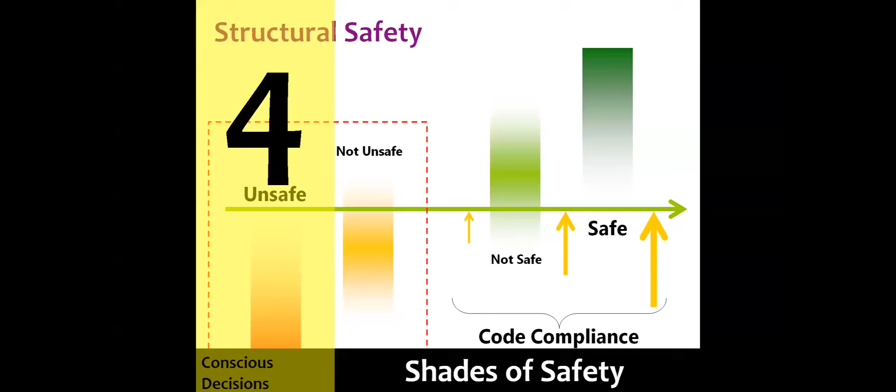So these are some conscious decisions to reduce the shades of safety that we are practicing today. We would like to minimize that into a small corner towards the right, and that will be our agenda for code compliance going forward. Furthermore, if you look at today's design process, we choose materials, design sections, and go ahead and build.

Whatever happens to the structure after that, we are not looking at it until the structure itself starts crying, which means that we have forgotten two more aspects of understanding the behavior of structures. Their overall resistance and overall deformability have not been considered in our design process. So it's a one-way process that we are adopting, but what we require is a closed loop process.

And so we are now projecting towards, or walking towards, a closed loop design process where a designer knows exactly what has been proposed through the good-for-construction drawings.

The next point that is in focus, and has only ever been in focus, is cost. Every time we talk of structures, we want to reduce cost. Now there are five aspects you look at in a structure: safety, functionality, sustainability, aesthetics, and economy. Every time they want to affect economy, it is safety that becomes the casualty. We would like to emphasize that there is a bottom line for minimum expectation from every structure, and that bottom line is safety, functionality, and sustainability. The only two negotiable items are aesthetics and economy.

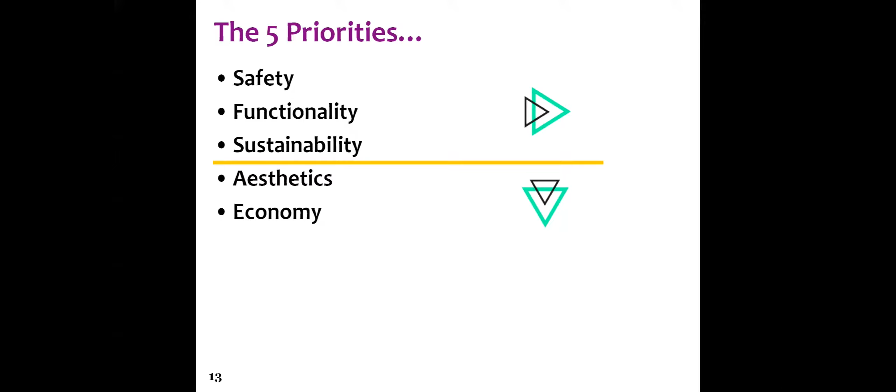Now you have two options: aesthetics on top, or economy on top. The first case is signature structures, where the owner will pay any amount just to make a statement. The second case is all the rest of the structures, where aesthetics is not necessarily the focus—if you can achieve it within that, well and good. So the sixth motivation for us is that this constant nagging discussion between economy and safety has to be clarified: there is only one boss, and that is safety. Nobody else is on top.

One interesting fact I'd like to mention: 78% of India was born after IS 456 was prepared. At least the design provisions were prepared in 1978. By 2000, we didn't make much change in the design provisions. We added some on materials, but that's not as large or significant as what we're doing this time. So I would say 78% of India was born after the standard was built.

So we are a little worried that we now have to go and unlearn and learn. 78% of India has to learn and unlearn the new standard we are coming up with, which means it has to be done in a participative mode. That is why we decided to have public consultations before we freeze the standard, because this percentage of people born after the standard is one too many.

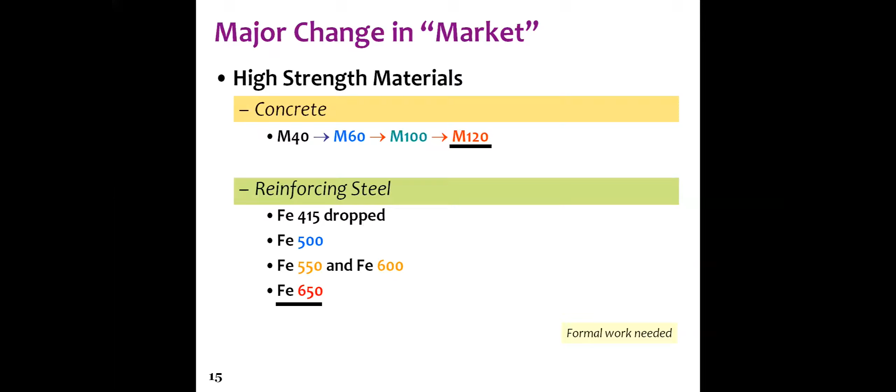We have design provisions understood up to 550, but not 600 and 650. Also, design provisions are understood up to about M40, M50, maybe M60 if you stretch hard, but not M120. So this is the game we are alarmed by: without formal work, we are going ahead and using these materials for construction where the standard has not yet admitted them.

We are also looking at a number of other important features that our standards keep using. IS 456 keeps using the words 'characteristic load' and 'characteristic strength' of materials, but are we really doing characteristic? When you look at a review of all the loads we have, some of them are mean and not characteristic. So there is a lot of formal work that we need to do on this front.

So why am I saying all this? Because even though we will come up with a standard this time, which is a little improvement over the previous one, I would still think the formal work has to begin in the country. If we have 11 chapters in the new standard, I would like to see a group of people on each of the 11 chapters steering the agenda for the next 10 years, doing deep R&D work, and coming out with valuable inputs so that subsequent revisions can stand on firm ground of self-reliance rather than peeping over the neighbor's windows.

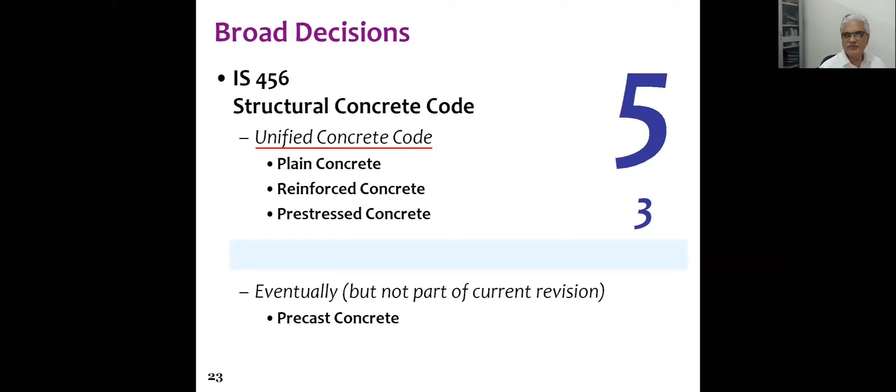Earlier we had thought of unified concrete code, but it will become unified only if we can get precast concrete in, which is not yet on the agenda. Maybe in the next revisions we will look at bringing precast also inside this one. So in all, the fifth revision of 456 and third revision of 1343 will together become 456, and we will not have 1343 in the time ahead after this revision is effective.

So what do we have, what are we expecting in the new revision? We're looking at 11 chapters. Other than the first three, we're looking at basis of design, design loads, structural materials, structural analysis, structural design and detailing, construction, inspection and testing, and dismantling and demolition. This is the overall layout.

So as you can see, Mr. Arora's group is working on chapter 6, chapter 9, 10, and 11. Also in chapter 8 on structural design, there are two sections, one on durability and one on fire resistance, that he will be working on along with his colleagues. He will present that to us after I finish. He is coming on and sharing what they are doing, what they have done so far.

Let's look at the design loads. These design loads existed in the document at different parts. So now we have collated them into two sets. We call them force loads and displacement loads, right? Force loads, as you are aware, are the traditional loads.

We are looking at the typical undergraduate student who wants forces given to him or her through the standard. He or she applies it on the structure, does structural analysis with a fixed base, and then gets the results of bending moment and shear forces. So that's the force load part.

But what is not taught in undergraduate education largely is temperature load. How do we bring the temperature variation as a matter of structural analysis? Creep load, shrinkage load, elastic shortening, foundation settlement may have been discussed in undergraduate, but structural analysis computer programs don't necessarily all have the foundation settlement part.

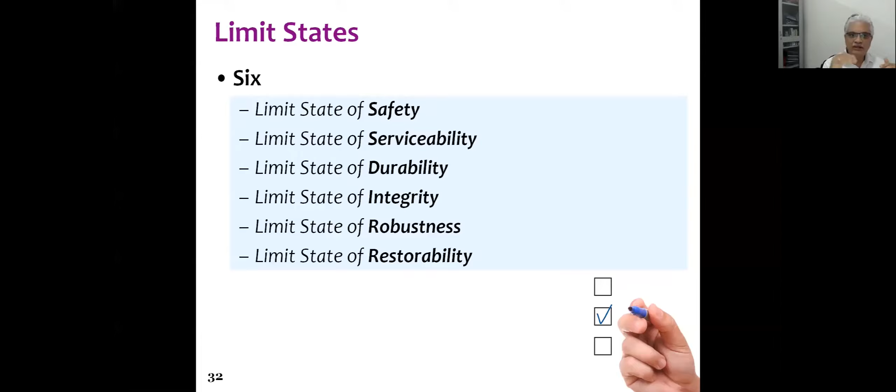Now what are these 6 items? Let's go one by one. Safety, I don't have to tell you - you apply loads and it can't take the loads, right? That's the game of safety.

So what are we looking at? We're looking at strains going past the material limits, or strengths going past the section strengths. I'll elaborate that a little later again.

Serviceability - you're familiar with this. We have deformations in the members, individual members, and whether these deformations are acceptable or not. Also, if you're looking at a structure that should not crack, we need to limit the stresses to less than the tensile strength values in case of reinforced concrete. Crack width should be limited, rotation should be limited, vibration should be limited - all these items come under serviceability.

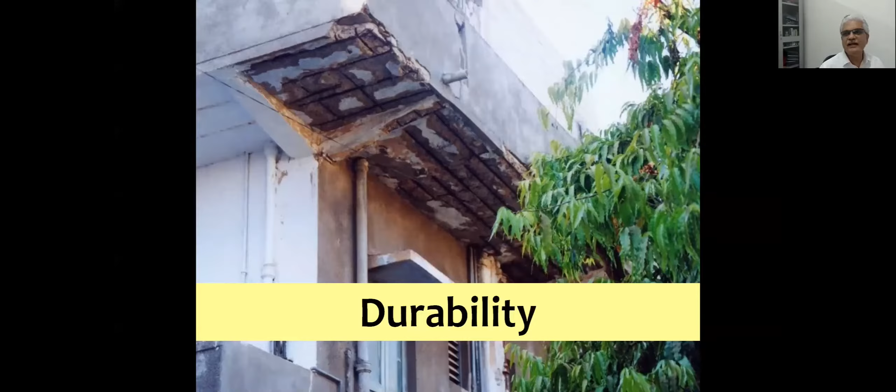Durability - you are seeing durability all around you, so I don't have to describe it. Whether this structure will last is the question. So far we don't have any method, but now we will tell you that you can design a structure for 50 years, 60 years, 70, 100, maybe 120 years.

You can decide, but the responsibility lies on you in ingeniously choosing cement grade, cover, pre-stressing steel grades, pre-stressing and reinforcing steel covers, grouts that you're using, water cement ratio that you will have. A number of items are there for checking durability, but you will now be responsible for choosing consciously

the life of the structure, and put one number on top of the drawing that this is the one I'm guaranteeing, and put your signature and a seal under it saying this is my proposal - good for construction and good for survival for so many years. That is what we will do as practicing engineers in time ahead.

Robustness is your fifth limit state. Robustness is to do with blasting, fire, and impact. So we are looking at strength - not the design strength, but the inelastic strength, the plastic deflection, the plastic rotation. These will be the items in focus for robustness. So now you already can see that we're not talking linear behavior - we're talking nonlinear behavior already in robustness.

Integrity: if one member goes wrong somewhere in a structure, will the whole structure come down? So you're talking about blast, impact, fire, and earthquake causing this one member to vanish. And if that happens, does the structure have enough redundancy, and does it have enough inelastic deformability, for you to be able to say that my structure is having the required integrity?

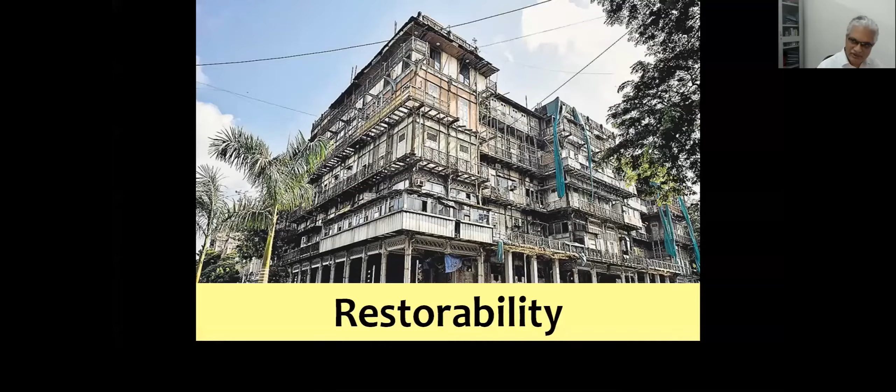So in case it is damaged or deteriorated, can we restore it back? But for this standard, the focus is: can you design a new structure to limit damage to accessible locations? That means you as a designer will choose exactly where damage should be, and place the damage, allowing it to occur only there.

Those locations should be accessible so that after the incident, we can go and fix that particular portion of the member. Also, the retrofit should not be extensive - meaning vacate the whole building, move everybody out, leave me for 2 years, I will decide what to do and give you the building after that, but before that give me a big check. No, that's not the method. It should be a limited amount of retrofit, and it should be at affordable levels, commensurate with the structure that we are discussing.

Small structures, mid-rise structures, high-rise structures - what can be done? This is what we want to come up with at the beginning itself. So restorability will also find center space, even though you may see only a few pages written this time, but we assure you, as we learn more, those few pages will become a large number of pages. As more of you contribute to what is restorability, we will come up with more clauses, more formal statements related to how to ensure damage is limited to accessible locations and that the retrofit is actually at affordable levels.

So putting all of these 6 in perspective, you are familiar with where serviceability and safety lie. This is what you're doing normally, and you're using linear analysis. The graph also shows you that more or less it's fine, we'll do it linearly, it'll work. But when it comes to robustness, integrity, and restorability, the game is on the horizontal part of the load deformation curve of the structure. That's where you'll have to change your tools - linear analysis will not suffice, and you will have to move in the direction of nonlinear analysis.

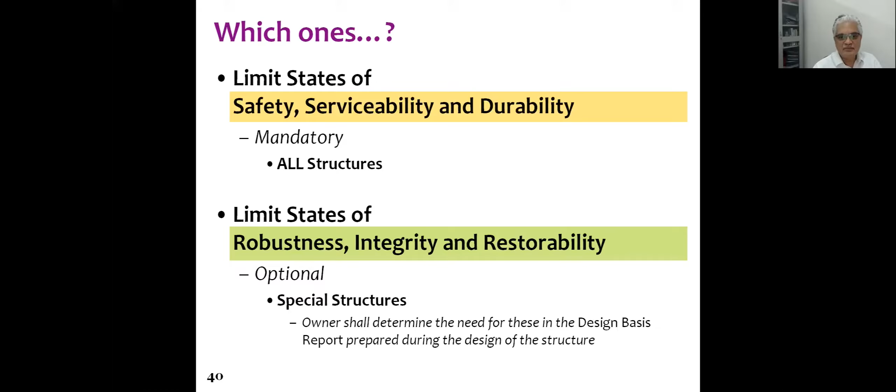But in all structures, the top 3 are non-negotiable, and that is what we showed you at the beginning: safety, serviceability, and durability - top 3 are non-negotiable. Bottom 3 depend on the seriousness of the structure, importance of the structure, criticality of the structure, and so on. We have some nationally important structures - we have to protect them, come what may. That will come under the total basket of 6 limit states. So let's look at some of the major changes that are coming up.

First of all, systems. I won't tell you which systems are admitted, but I'll definitely tell you which systems are worrying us. We are not sleeping at night because we don't know what is happening with buildings. The hotel I'm staying in is on a flat slab with post-tension PT slabs and has no structural walls. What is the lateral deflection? It's very worrying to go to any hotel in the country.

So we are now saying, please exercise extreme caution when looking at pre-tensioning and post-tensioning slabs used in any system, because in all 100 to 120 mm slabs, 4 major activities are happening: top cover, half of the anchorage, the draping, and the bottom cover. It's like magic happening, but I would like that magic removed so people know exactly the realities. Let's work harder and come up with the real truth on these matters.

Many of you have seen damages. Many of you have seen distressed conditions. So I don't have to say more, but I'm extremely and deeply concerned, as is the committee, that we don't know how to write provisions to stop this kind of unregulated practice from happening.

On the hit list are also 5 other items: open structures, open story structures, flat slabs used without protection of structural walls, precast systems, pre-engineered buildings, and all-wall buildings. We'll try to admit a few of them this time, like all-wall buildings and open ground story or open story buildings. But we personally think we have a long way to go in fixing the middle ground. We need to learn more, and a lot more experiments have to be done before we can make an emphatic statement. But until such time, it will be best for you not to adopt these systems unless you have evidence of experimental nature guaranteeing, through a full-scale test that you have shaken, that it is in order.

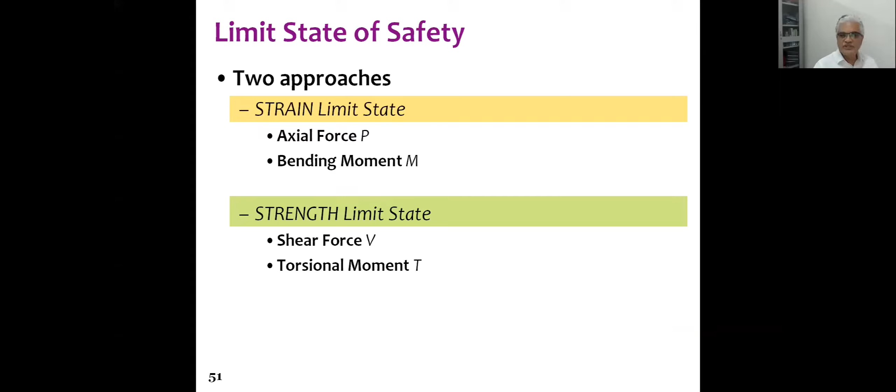So the limit state method is seeing a small change, but it has a great impact. We're not changing the basic framework so far, which is strain limit states for axial force and bending moment, and the combination of P and M, and strength limit states for shear force and torsional moment. This remains the same, but the way we do strain limit state for bending is going to change.

I must also tell you that in the 5th revision, we will continue with the strategy of the 4th revision, but we are poised to look at a possible 6th revision in which shear and torsion also should go into strain control and not strength control. This will require a few experiments to be done, and if that is done, we'll be able to win over the entire framework of limit state design a lot more respectfully than what we are doing right now, where we only know the strength of shear and torsion.

Because when you do, let's say, limit state of serviceability, you have to do some pushover analysis. For shear, there's no load deformation curve right now. We are adopting curves given internationally, but we have to develop that for our own Indian conditions. Now, the earlier strategy was that we were looking at the strength of a flexural member based on crushing of the core concrete, not cover, but core concrete.

But now we are looking at yielding of the steel bar as the basis. That is going to happen much earlier. And we are going to say that we want to have only under-reinforced sections. We cannot admit over-reinforced sections. That's a major change. We are insisting that it's very crucial for this nation to have under-reinforced sections than over-reinforced sections.

You might get embarrassed by seeing some of the changes in the geometries that you'll get. If you make this one small change, it will affect your sizing, but don't get too worried. In the 1960s, the structures were built following this principle only. Somewhere down the line, we economized so much that we lost safety. Now we'll bring back the 1960s again.

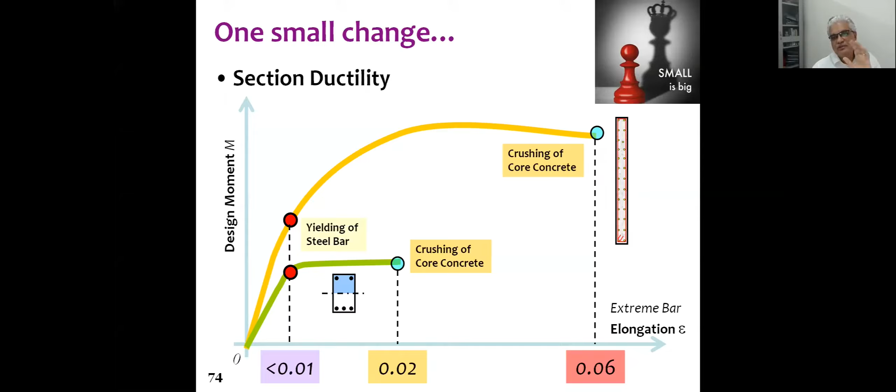Working stress method: in the middle, there was this excitement that we're going to get rid of the working stress method and we'll have all pure limit state design. As Jaya Bhaduri will say in Kabhi Khushi Kabhi Gham, 'Galat' - that's not true. We just can't do away with the roles and responsibilities of different methods.

Working stress method is very easy for us to do limit state of serviceability. Now, some of you can stand up and say, no, I'll use the nonlinear stress-strain curve, use limit state method and do that limit state of serviceability. By all means, you can do that, but the equations are intricate and involved, and so it will require more effort from your side. The same solution can be obtained easily by the working stress method.

As before, both of these methods are tuned, so they will give about the same result for limit state of serviceability - result in terms of section or amount of steel and so on. So it can't be too different, results will be about the same. So you will see that for deflection, crack width, all these, the working stress method, which is assuming linear relationship between stress and strain, all that will come in very handy.

Materials is an important section. Arora Saab will elaborate in detail. Let me just tell you quickly what's happening.

We're looking at major changes in ingredients. Guidance on the use of different cements will come - OPC, PPC, as general purpose cements. Can we use them for normal use? That's the question. Curing water, there's special requirements coming up now. You just can't use any curing water.

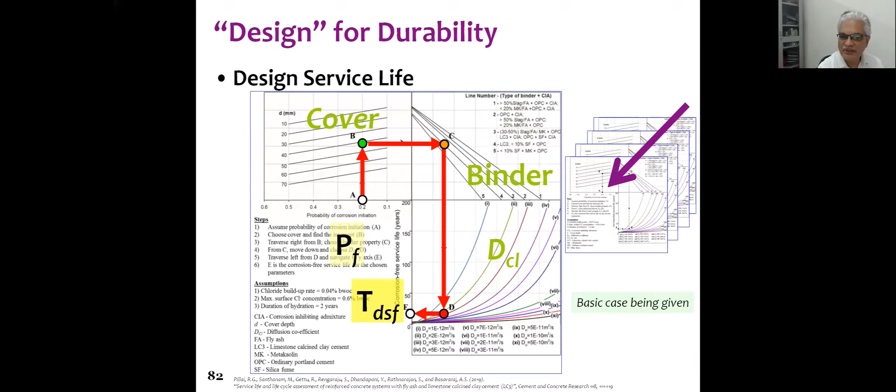If you want higher design life, you have to have very stringent conditions for the choice of materials, the cover, as well as the environment. So service life, as I said, can go up to 120 years.

Exposure to different classes shows different deterioration mechanisms. We'll give you the basic ones this time, and hope to keep adding new mechanisms ahead. You'll also see a climate zone map of India, with durability requirements specified zone-wise, making it easier, like you do for seismic zone or wind zone.

Only thing is, you have to keep an eye on wind zones, seismic zones, and now durability zones also, along with climate zones. You'll have to watch out for a multi-faceted design going forward.

And what is the impact of quality control? Quantitatively, that is what we want to bring about. Let's see what clauses we can carve out for you on this.

A procedure is given for carbonation and chloride ingress this time, but we may add more in time ahead. For the other deterioration mechanisms, deemed-to-satisfy requirements will be provided this time, so that you're not left open to do anything, but know what to follow until you have more knowledge.

It's like your mother telling you, after finishing school, come back straight with the rickshaw-wala, don't go here, there, anywhere. That is exactly what we're doing. After you finish carbonation and chloride ingress, you just do these steps and come back to say your design is deemed to satisfy. That's all.

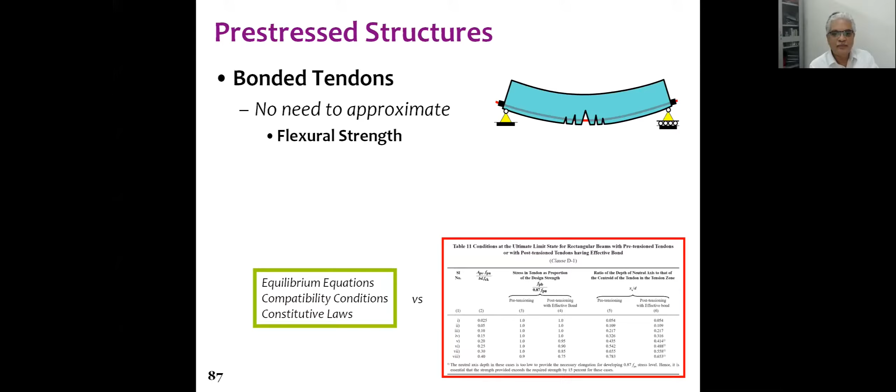You don't have to be preempted by the standard on what X by D will be. For the steel you are providing, you can come up with your own exact X by D, not bound by any prescriptive values. This will be valid for both bonded and unbonded tendons, in both cases you'll be able to do that.

You'll see some interesting ways of trying to estimate these strengths, very much in line with what you do for reinforced concrete. So it's not going to be a difficult surprise for you. What you do for RC, you'll do for PSC also, with small changes, as expected.

Structural analysis will be greatly elaborated and clarified. As I mentioned last time, serviceability and safety are done with linear analysis, and all others will use nonlinear analysis. Linear analysis is already there, you know it. What you need to know is nonlinear analysis.

In nonlinear analysis, if you can't do full nonlinear, an approximate one-level approximation for geometric nonlinearity alone is admitted. For material nonlinearity, no approximations are allowed, you have to go through the full hard route. I hope you will quickly learn the nonlinear tools so you can comfortably use them for the other three limit states: robustness, integrity, and restorability.

I'll have to come almost to the end now. I'm saying that this revision was particularly motivated to increase the sensitivity to keep in mind the teachers, and see if they can make it enjoyable to learn reinforced concrete design in the classroom and consistently give the same rendition so that students don't get mixed up.

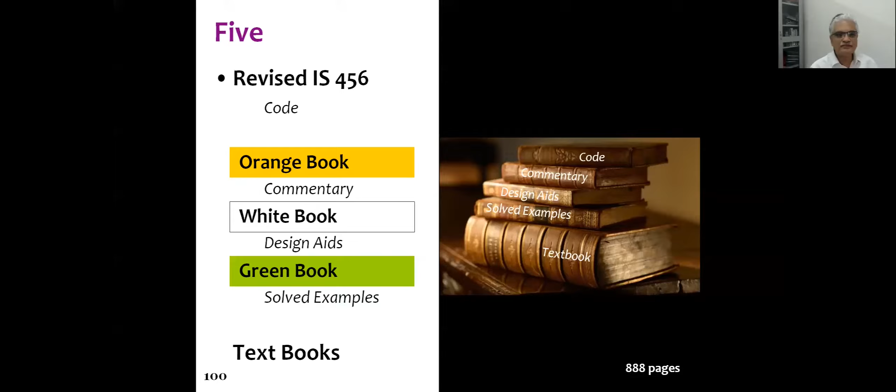So I'll stop here by simply saying that the new look that we are having for the structural concrete code has 456 and 1343 combined. The new limit states are defined, and the focus is on new structures as well as on assessment of existing structures. So design of the new and assessing the old.

Both are in focus, and that's why we brought in restorability also in focus and brought in nonlinear tools in focus, because a large number of us will have to do assessment of existing structures.

The higher grades of materials that are coming in are warranting us to change our design calculations. But since we don't have enough experimental evidence in all cases - we may have it for materials, but we don't have it for member behavior - the combinations of which grade of concrete, which grade of steel is acceptable, that answer we don't have yet because we haven't done experiments yet.

So we will have prescriptive statements for the time being, and I pray that you will admit that prescriptive statement as the way of life until such time more experiments are done. I encourage each one of you to encourage the testing houses, the academic institutes, R&D laboratories to do more formal work on the behavior of reinforced concrete structures. I prefer full scale, otherwise it will not give us a complete knowledge of what we have.

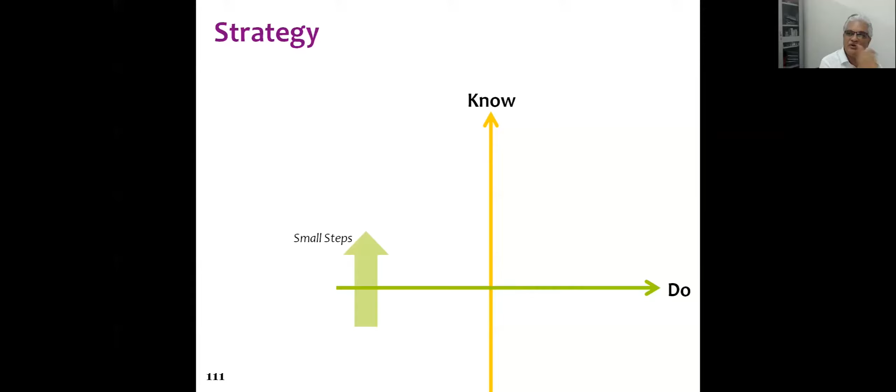Okay, the structural concrete code is only on its positive trend now. You just can't afford to slip it. It can't go in the backward direction. So give us only considered opinion that is good for the nation, and we'll take it forward.

And this time we'll guarantee you that safety will be on the driving seat. I would thank Alpa Shetji for putting together this forum and membership.

A large number of you have come in today to listen to the future of the nation on reinforced concrete structures. And I thank each one of you joining us, but I will thank you profusely in the event if you give us more inputs that the code committee can work on and build a much stronger code for the safety of everybody. And next time I go to any hotel, I won't feel uncomfortable that I don't know which structural system I'm sleeping under.

Right? So let's move from darkness, from untruth to truth, from darkness to light, and from death to immortality.

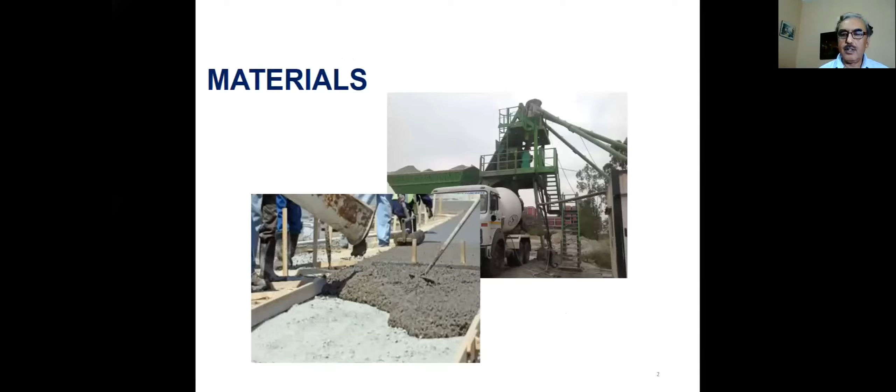Starting with materials, earlier we had material, workmanship, inspection and testing, and now we are having a separate chapter on materials which will include prestressing materials also. Then a separate chapter on durability design, we'll talk about durability in that chapter. Construction and quality control will be a separate chapter, and inspection, testing and monitoring of structures is a separate chapter.

Major changes have been just highlighted by Professor Murty also: guidance on different types of cements, updated water requirements, more types of chemical admixtures, limits on use of mineral admixtures, prestressing materials and grout of prestressing given. Concrete up to M100 included. Properties of concrete modified in view of the introduction of high strength concrete and new research during the period.

Same as for 383, there has been an expansion of the weight of different types of aggregates - what will be called normal weight aggregates, what will be called heavy weight aggregates, and manufactured aggregates, iron slag, copper slag, bottom ash permitted. Earlier it was mentioned only in 383. So this is now being brought into 456 also.

For using lightweight aggregate as structural concrete, we have a document on sintered fly ash aggregates for structural use. But we are not directly putting that in the main chapter of materials - we are simply referring it, and for using these aggregates, expert literature needs to be referred, as we have mentioned. There will be a separate chapter on special concretes where we will cover this. Those special concretes - we are not covering design procedure in detail in the code. So those are just to be touched on, like fiber reinforced concrete and lightweight concrete, so that we give some guidance, and then more literature can be referred while using those special concretes.

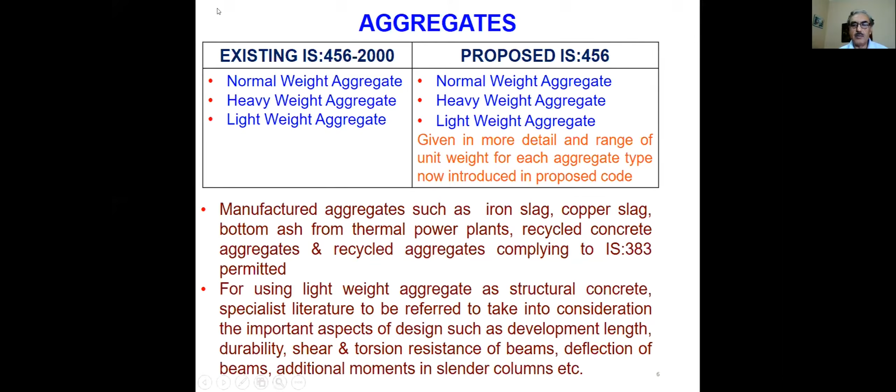Similarly here also, for cements - earlier we had been listing all cements in one go, saying all these cements can be used. Whenever you interview an engineering student and ask what are the common cements, he will start from rapid hardening. Most of the interviews we had been seeing that. So students won't know what is general purpose cement, what are special purpose cements, specific cements. So now this is separated out. OPC, PPC, PSC have been put as general purpose cements, and other cements have been listed, with some guidance given on where those specific cements are used, like composite cement - the new code has come. It was not in IS 456.

But as of now, the present position of the composite cement is such that we are not permitting it for RCC till the code is revised to some extent. So composite cement is permitted in plain concrete, which is not containing reinforcement.

Microfine cement is generally used for rock grouting and all that. Super sulfated cement, SRPC - these are sulfate resisting cement and special application cements, and these are to be used according to the applications listed in the code.

Coming to water, some more details have been added regarding what kind of water can be used. Natural surface water can be used, treated water can be used, water recovered from process in different concrete industries can also be used, as well as water from underground structures, recycled water, and desalinated water.

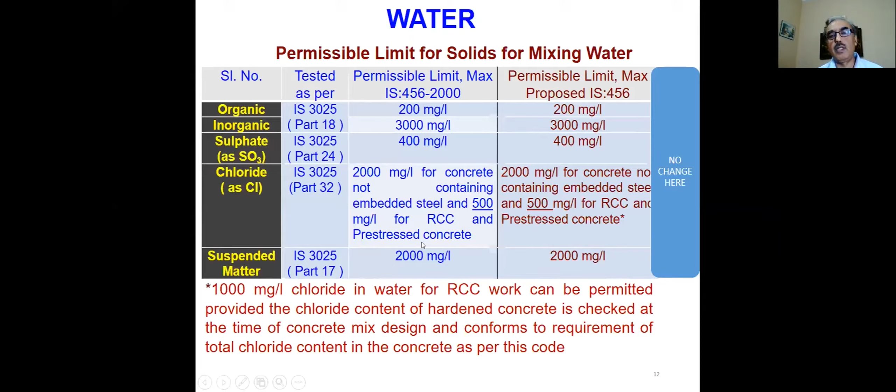For curing water also, we are not changing much of the specification, but for example chlorides up to 1000 milligram per liter - this is commonly used in many countries even for RCC. So this much we are permitting in curing water. Because for curing water, if we say 500, people don't comply, and without telling, they use it anyway. So we are giving some liberty, but if it is more than that, they have to use different water. Sulfates and chlorides - some minor changes have been made here for curing water.

Sampling frequency of water has been added, it was not there earlier, because water quality keeps on changing - the source keeps on changing. If some people are using tanker water many times, it changes quite a bit. So it has been mentioned that it should be tested every 3 months, and if there is no change or fluctuation, then the engineer in charge may allow a longer frequency.

Coming to mineral admixtures, all these admixtures are already permitted: fly ash, silica fume, rice husk ash, metakaolin, ground GGBS. Now ultrafine GGBS has also come, and that also we are permitting for use in concrete.

Other major changes with respect to mineral admixtures in proposed IS 456 are that the total replacement by fly ash and silica fume shall not be more than 35% for reinforced cement concrete. What happens is when we put fly ash in concrete, carbonation increases at a faster rate, which affects durability, so there has to be some limit. We have put 35 because PPC permits 35 as of now. I would have preferred 30, but 35 is agreed as of now.

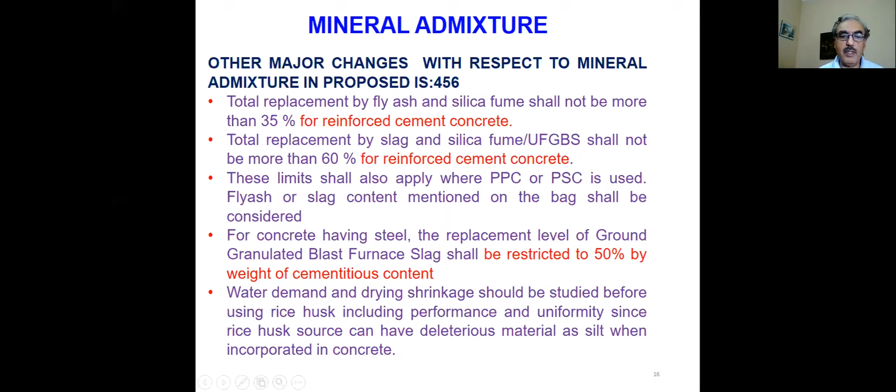Water demand and drying shrinkage should be studied before using rice husk ash, including performance and uniformity, since rice husk can have deleterious material like silt when incorporated in concrete. Rice husk has got more variability in quality, so these precautions have specifically been mentioned to be taken when using rice husk.

Chemical admixtures will be covered only in 9103 in detail, but we have mentioned in 456 that these admixtures can be used when conforming to 9103, though 9103 doesn't have these admixtures as of now. So we are parallelly revising 9103 also to include these chemical admixtures.

We intend to use shrinkage reducing admixtures because they are being commonly used in the country, people are using it, corrosion inhibiting admixtures, permeability reducing admixtures non-hydrostatic type, and permeability reducing admixtures hydrostatic conditions, PRA and PRAH they are called. Shrinkage compensating admixtures shall not be used in the country, this we are not permitting. Shrinkage compensating admixtures cause expansion to some extent to cover up the shrinkage, so they are not reducing the shrinkage, they are doing some expansion. So if expansion is little more than the shrinkage, it can be disastrous. So this is not permitted in structural concrete.

Grades: earlier also we had 3 categories - ordinary, standard, and high strength concrete. So these 3 categories we are maintaining, but we're going up to M100 now. Ordinary concrete is M10 to 20, standard concrete is 25 to 60, and high strength concrete is 65 to 100.

Earlier these definitions were not there, so we are defining this nominal mix or design mix. Ordinary concrete can either be nominal mix or design mix.

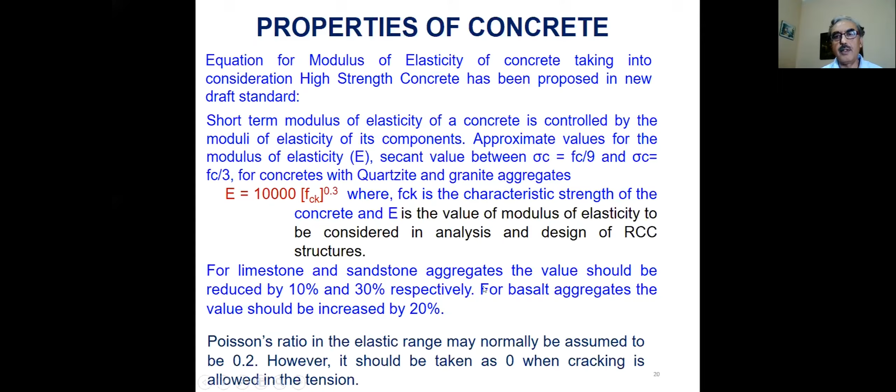Equation for split tensile has been added. It is FCT split tensile equals 0.5 into root FCK. And here also the procedure for getting the mean value is indicated for design purposes, design mix stages.

Creep has been revised. Creep in 456 was different from what was given in IRC 112 and elsewhere, Eurocode also, FIB - everywhere it is similar. So taking from the similar approach of FIB, which is used in IRC 112 also, this has been modified and somewhat simplified, and 3 levels of creep have been provided: creep level 1, creep level 2, creep level 3.

Creep level 1 is for RCC beams, frames and slabs of spans up to 20 meters and height up to 30 meters. Similarly, creep level 2 is pre-stressed beams or slabs of span up to 20 meters, buildings up to 100 meter height, and cable stayed bridges and all that. And creep level 3 is further higher.

Pre-stressed box girders, cable stayed arch bridges which span more than 80 meters are covered in creep. At creep level 1, the coefficients are only for all sizes, a single coefficient like in the existing code, given with minor changes in the values.

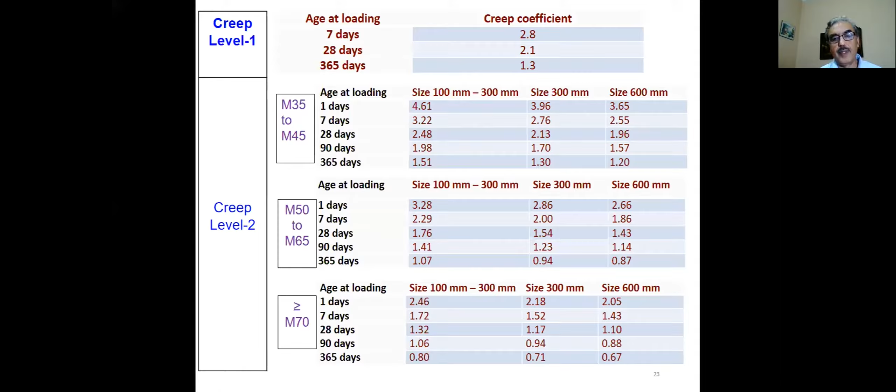These tables have been given. If you see the 28 days loading stage, there is not much change. For example, here it is 2.1, 2.48, and when the sizes are bigger it is somewhat similar, so it is just a little more rationalized. In case of higher grades, the creep is less; in case of lower grades, the creep is more.

Creep level 3 is when we go beyond 75 years service life, so some notional increase in creep is considered here, and formulas have been given to increase the creep calculated in level 2 to level 3. Then some additional coefficients have been given.

However, these coefficients are applicable when the compressive strength does not exceed 0.36 FCK at the age of loading, and mean temperatures are in the range of -20 to 40 degrees centigrade. If temperature increases, the creep coefficients have to be multiplied with a coefficient.

Shrinkage of concrete is generally in line with IS 1343, merged with 456, and the same has been adopted, which depends on the constituents to some extent and is a combination of autogenous shrinkage and drying shrinkage. Autogenous shrinkage has been given grade-wise, and drying shrinkage has been given for two values of relative humidity in the ambient conditions, 50% and 80%, for different grades of concrete. A coefficient to be multiplied is based on the size of the member.

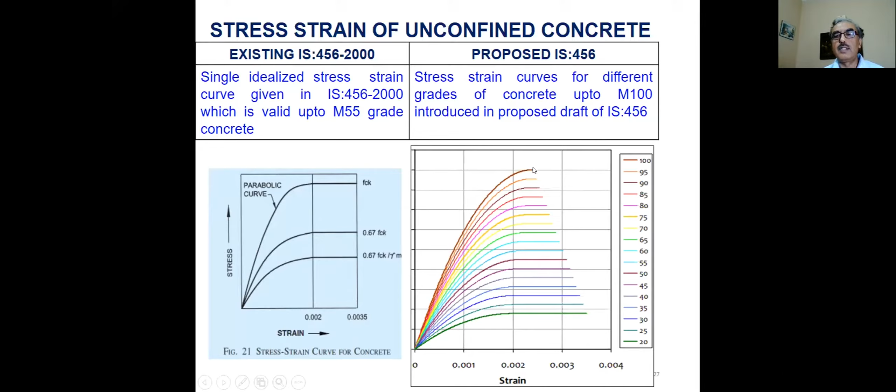If you go to M100, the curve becomes steeper, and there's not much difference between the peak and the ultimate, like we have here 0.002 and 0.0035. There's a big gap here, but at the top it's nearly matching. Keeping this range in view, for lower grades we have existing values up to M20, and then we are proportionally increasing it up to M100.

If you approach M100, you will see both values matching, 0.0024 and 0.0024, because there's no difference in peak and ultimate. So for M100 also we are taking this, and it gradually reduces to M20, where we have the existing values of 0.002 and 0.0035. Accordingly, the stress block parameters will change — it will become dynamic depending on the grade of concrete, which will be discussed in detail by Professor Rupen Goswami in his presentation.

Just a minute, why is it not moving now? Okay, sorry, it was stuck somewhere.

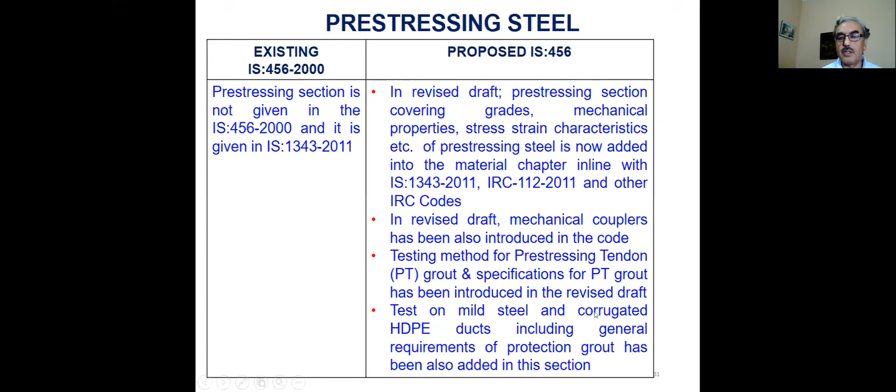So that covers the changes quickly, and now we can discuss the durability part.

As discussed this morning, we have given procedures for the design of durability, choosing the cover and grades to meet durability requirements. However, because durability is a very complex procedure with so many factors, not every factor can be accounted for. There are many factors like type of binder, and even within a particular type, what kind of chemistry is there, the ingredients, mix design, SCMs, and the environment - so many internal and external factors. Each factor cannot be put in, so some rigor also has to be based on experience.

Just as we were talking about working stress versus limit state design, here also we are keeping a limit state approach of durability design for carbonation and chloride. At the same time, we are keeping a deemed-to-satisfy kind of table like we had earlier, but in a modified form for different types of cement. I will discuss that - it is kept up to 50 years of service life.

Beyond 50 years, we have to do a detailed design, but there are certain minimum values we have to follow. So what we are covering is: exposure classes have changed, design for durability has changed, and we have permitted some protection measures, though not much detail is given on that. The concept of design for durability has been introduced, along with the concept of service life. There is now provision for durability design for 50 to 120 years, exposure classes for different deterioration mechanisms, and a map of India showing climatic zones linked to durability requirements.

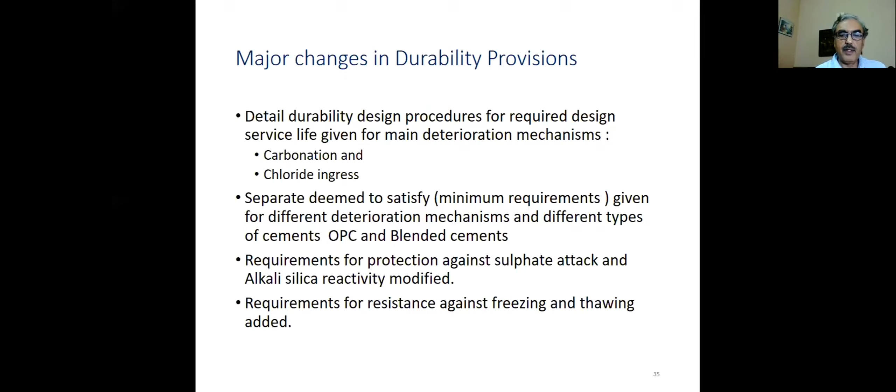Durability testing has also been introduced. Because we are making the code performance-oriented - specifications for grades or workability are already performance-oriented - similarly for durability we have to introduce performance-based specifications. One is performance design, then performance specification also when using the concrete. So some durability tests are to be introduced.

There are many tests like electrical resistivity, RCPT, oxygen permeability, bulk resistivity, and air permeability. Based on the data available, we have introduced these. I will discuss that.

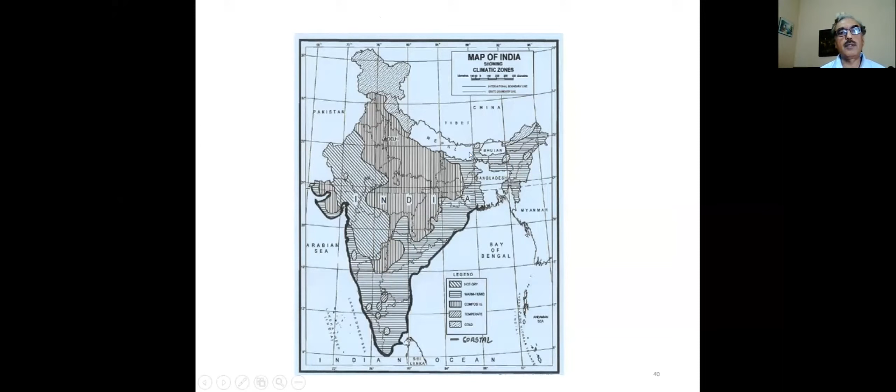Now what happens in carbonation? When we have reinforcement, it has got a passive film when we do RCC work. The calcium hydroxide present in the concrete, generated on hydration of the cement, provides a passive layer on the reinforcement. When carbon dioxide goes in, it reacts with the calcium hydroxide and disturbs the passive film, and the corrosion starts. That is the main mechanism in most part of the country.

Now this rate of ingress of carbon dioxide will be determining your service life. This varies for different types of cements, different types of binders, with different water cement ratios. If it is more dense, it will be slow. If higher pH value, your carbonation will be lesser. If there is a low pH value already in the system because of blended cements, high value of fly ash,

50% of fly ash, the pH level goes down to anything, so there is hardly any protection available to reinforcement. So if you know the carbonation coefficient, the rate at which carbonation goes inside, we can determine the service life because we know the relationship. We have got equations for that.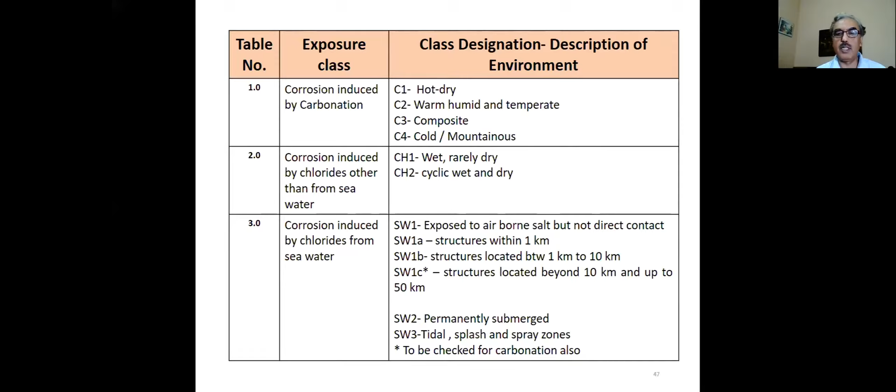Similarly, for sulfate attack we have given 5 conditions, and for freezing and thawing also 3 conditions for which the guidance has been provided.

Now coming to the design for durability, this I think mostly we discussed, we come to that. Now coming to the carbonation induced corrosion procedure, sorry.

We have provided a design table for normal structures subjected to carbonation for 50 years design service life, for quality control levels of 2 and 3 and importance level of 1. The design table gives requirement of minimum cover, limiting value of maximum water cement ratio, water cementitious ratios, cement content and type of cement, minimum cover requirement, and durability test requirements.

This is the existing table. We had a very small table and it was not related to the type of cement being used. This is the new table we are giving for 50 years service life, quality control level 2 and 3. What is 2 and 3 will be discussed in the quality control chapter. Now here, for example, the hot and dry environment.

For external members, if using OPC, these are the values of cover, water cement ratio, and minimum cement content you have to maintain. If using PPC or OPC with fly ash, these are the values you have to use. Similarly, for other conditions, for warm and humid and temperate environments, for internal members it's different. For external members, it is more stringent.

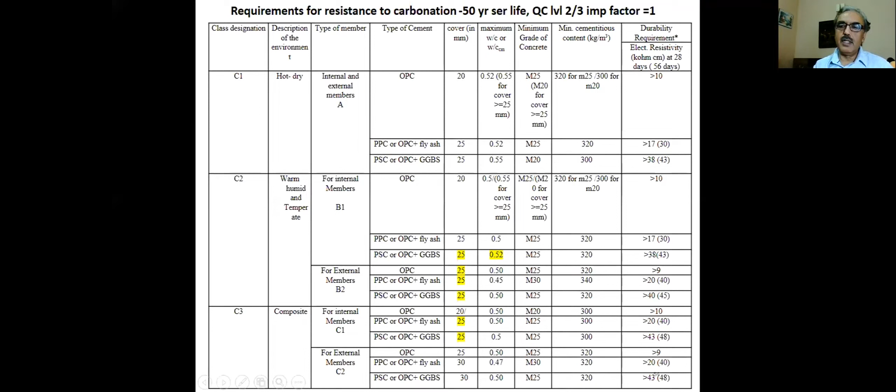This is for composite environment and cold environment, cold mountainous. C3 was already discussed, with internal members and external members, and then we have put some notes as they were earlier. Now also we have put some notes that where the grade of concrete is more than M30, durability testing may not be that essential.

And for quality control level 1, where the durability tests are not being done, the minimum grade can be increased. So those kind of additional notes have also been put for adoption at different areas where we don't have facilities, or where we're using very high quality concrete - then this durability test may not be of any value, because we will be achieving it in any way.

That is the kind of minimum requirement we put in the table, but for higher values of importance factor or for longer life than 50 years, we have provided a procedure for the limit state design of carbonation induced corrosion.

The basis of the following parameters: first we see what is the definition of limit state for carbonation we have to use. The limit state of durability for carbonation induced corrosion will be the initiation of crack due to reinforcement corrosion, caused due to depassivation caused by the carbonation process. This is how we are defining a limit state.

So when you achieve this limit state, your service life is over. This is a presumption for new buildings. It is not for existing buildings, that a crack has come and service life is over - we are not saying that. This is a design process for new structures where we have to say how we design. That's a systematic procedure which everybody has to adopt.

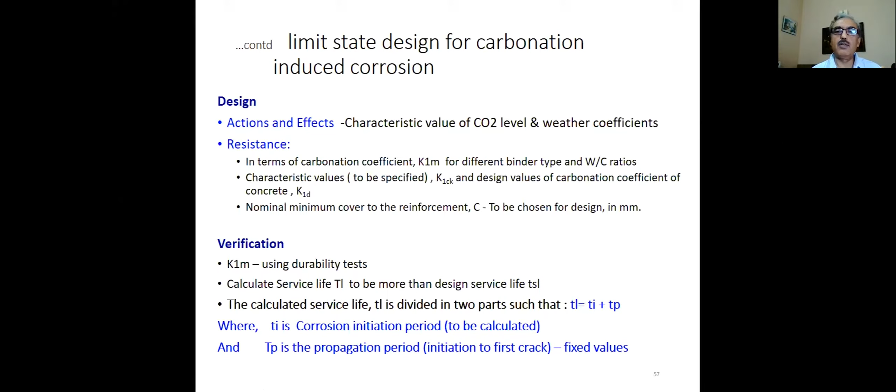And the remaining is the propagation part, from initiation of corrosion to the cracking. Now we have got a reasonable model and data available on the first part, that from the date new structures' concrete is laid to the initiation of corrosion, we have more data and equations available. But for the propagation period, the process is more complex, and though models are available, they are more complex, and as of now they have not been included. So for the propagation period we have given fixed values, and we can deduct the propagation period from the service life, and from the equations determine the other parameters. I will discuss that.

Then we work out the characteristic value of coefficients by adding some standard deviation, which can have levels also. And then the design coefficient to be adopted, keeping some margin of safety on that, which we are putting - not very high - factor of safety, because even 1.1 changes the structural requirements significantly, cover requirements and grade requirements.

Nominal, then we come to the minimum cover. We have got a nominal cover, then we have design cover. We put some factor of safety - where quality control is high, we keep it 1, because we are not permitting any negative deviation in the cover per our specification tolerance factor. But where the quality control level is poor, the cover can come down there also, so we are having some factor of safety on that too.

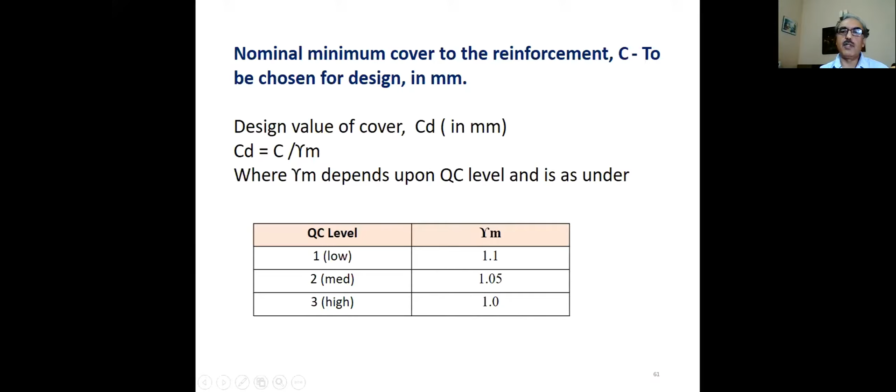For the propagation period, now we have a table which is based on the grade of concrete, type of exposure class, type of member, type of cement. Now this propagation period we have kept at 5 years to 13 or 15 years for different types of structures and these parameters. The remaining part has to be determined from the equations given in the code.

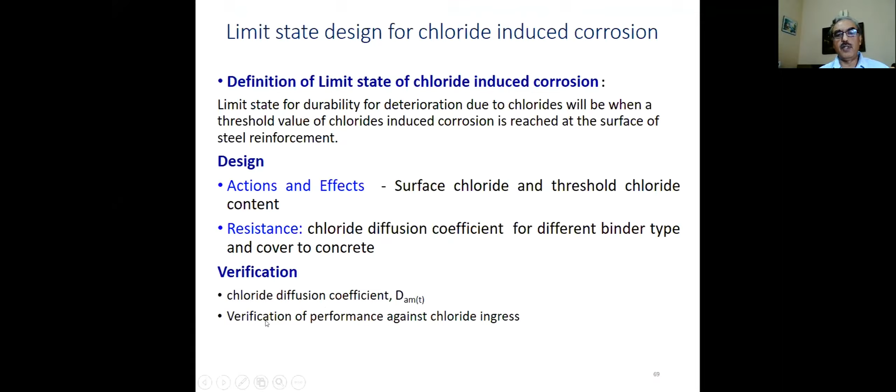Now what chloride concentrations do we consider for designing? Near the shoreline we take 9 kg per cubic meter as surface level chloride content, at 1 to 10 kilometers it is 1.75 kg per cubic meter, and at 10 to 50 kilometers it is 1 kg per cubic meter. This 1 kg is quite close to 0.6, which we are permitting in any case as an initial chloride in the concrete itself, and at this level generally corrosion does not occur in many cases.

Threshold chloride content: earlier, generally in ACI also, it was taken as 0.4% by mass of cement. But research done, specifically data given by Professor Radhakrishna Pillai from IIT Madras, found that in case of PPC and PSC, though the resistance to chloride ion is more, the threshold value is less than that of OPC.

In case of OPC, threshold means when the chloride concentration near the reinforcement reaches 0.4% by mass of cement, then corrosion initiates—that is called the threshold limit. So in case of OPC, we take it as 0.4%.

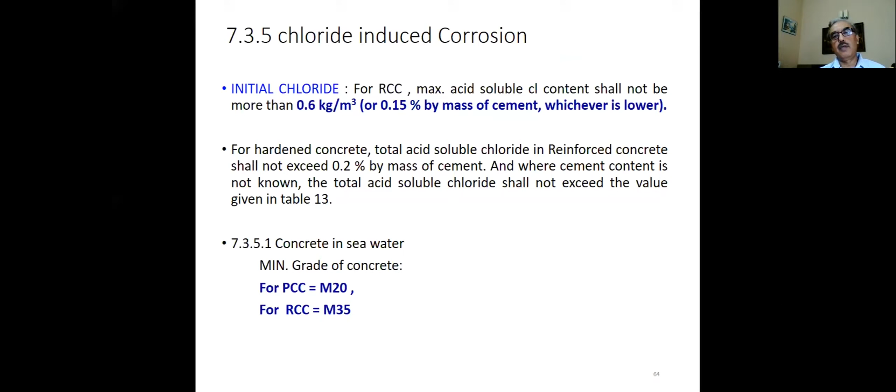In case of chloride ingress, there's a definition I had mentioned somewhere regarding the limit state for chloride. In case of carbonation attack, we said the initiation of crack is the limit state. But in case of chloride attack, the limit state is taken as the time by which the threshold value is reached—we don't wait for the crack.

So when the threshold value of chloride is reached at the surface of the reinforcement, we consider that as the limit state here, because in case of carbonation, at many places the propagation time is very long, say 10 to 12 years. But in case of chloride, because moisture is mostly available, the propagation time is less. So that has been ignored, and the threshold value has been taken as the limit state.

Coming to the sulfate attack, this table has been revised.

The exposure class is not much different from the earlier one, but what is happening here is that this is an existing table, and this is a new table. This is not yet finalized; it is yet to be discussed, and these values are not yet filled in either. But what we are going to introduce is high strength concrete in this.

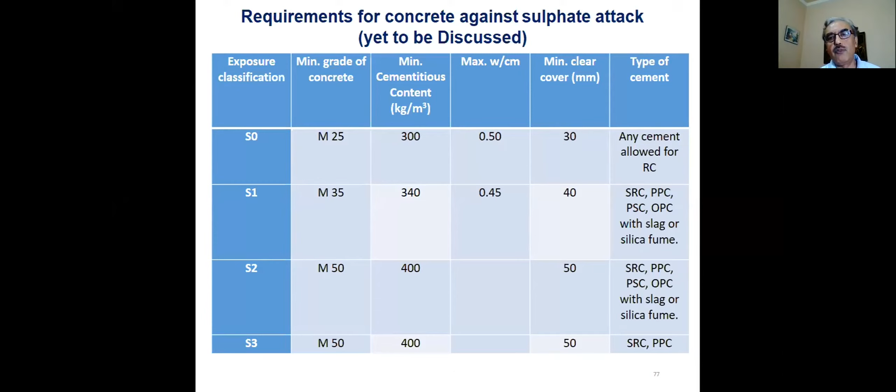Freezing and thawing has been discussed in the new code: the process, factors affecting it, a table for mean total air content, a design table, and recommending use of silica fume. I've not given the table here, but we have given air content values for different levels of exposure conditions. Like in freezing and thawing, we have made exposure conditions into 3 levels, and for different levels, different air contents have been mentioned.

Alkali aggregate reaction - the process is the same: alkali aggregate reactivity, alkali-silica reactivity, and alkali carbonate reactivity. This is silica, not aggregate.

Test methods: accelerated mortar bar test was not there earlier. Now we are introducing this also, accelerated mortar bar test. Mostly the ASTM mortar bar test is used, so it's a similar test. Now we are including that as well, and the mortar bar test is already there, so that will follow.

In mitigation measures, we had been saying that additional advantage can be gained by putting fly ash and using PPC. But now we are saying alternatively PPC can be used - it is not that only OPC has to be used and additional advantage taken separately. Because PPC and PSC provide a distinct advantage over OPC in case of alkali aggregate reaction, they provide very high resistance.

And there are test methods to again verify this. So what we can do is not only the standard testing, but use the proposed PPC and PSC and do a test. If the expansions are within limits at 16 days, less than 0.1%, we can use that. So these are some of the changes made. It's a kind of updation, nothing major as such.

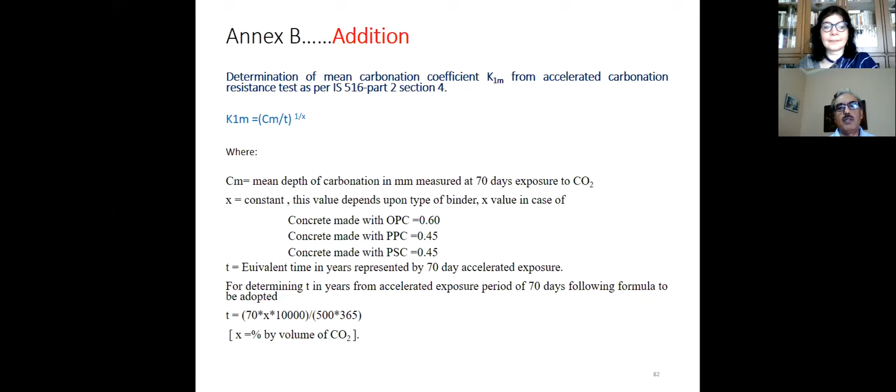No, thank you so much, Mr. Arora. Thank you so very much. It was fascinating. I must say you took us into a completely new territory of design for durability. And this is not just exciting but also very timely. And frankly speaking, for the rest of the design engineers, I think we just can't wait to get our hands on the draft when it is ready to really get our hands dirty, so to say, in designing for durability. Once again, thank you very much.

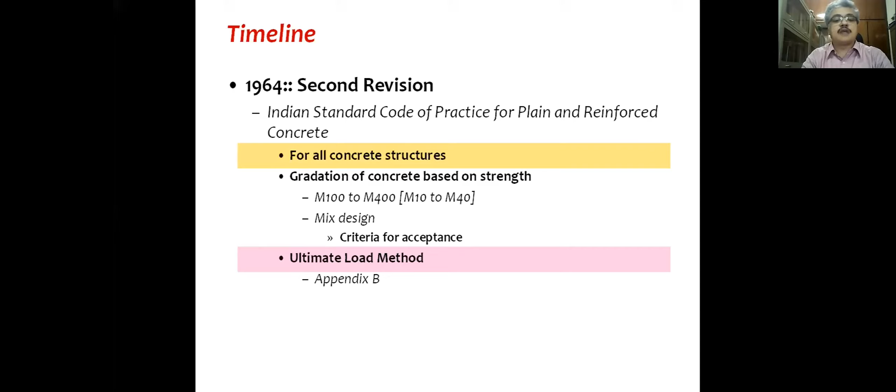In the second revision in '64, IS 456 was really opened up for all kinds of concrete structures. Very interestingly, in that revision, the ultimate load method was introduced, though in the form of an annexure or appendix B. This is where it all begins for us even today, because this is a quote from the '64 version, which talks about the concrete stress block. Until then, we were doing working stress methods, so we never bothered talking about a stress block. But here it said that it could be assumed to be a rectangle, trapezoid, or any other shape.

But then we chose to use this very familiar parabolic stress block, and there are many good reasons why this is a good choice, which we will not go into now. So essentially, this was the stress block used for the ultimate load design.

Then in 1978 there were a lot of changes, and one was that we migrated from working stress, and instead of going towards ultimate load, we moved to the limit state method. There were many good reasons for doing that, and even today it's an important thing. A lot of changes happened, but this was the key one.

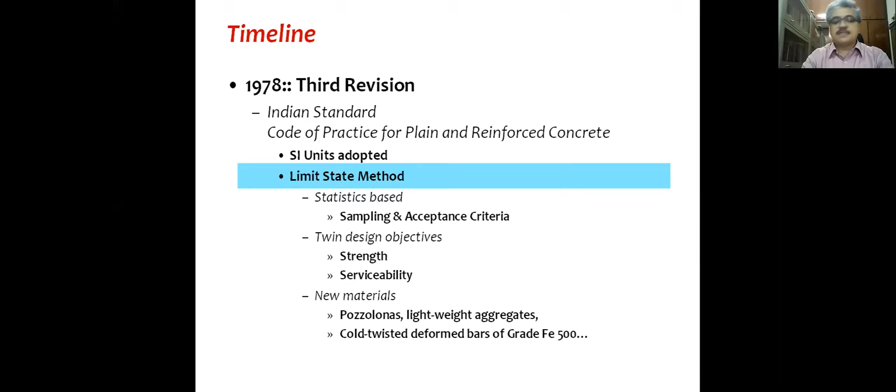I just want to highlight two statements from that revision: it acknowledged the importance of revising the reinforced concrete and pre-stressed concrete codes simultaneously, which is exactly what is being done even now. Second, with limit state design, the design calculations became more involved compared to the working stress method, and therefore design aids were prepared. So as Prof Murty pointed out, there is this plan of bringing out the white book, the orange book, and the green book. Essentially, we are sticking to that philosophy so that the engineering community benefits most.

Now, coming back to this design stress block - this is effectively the design stress block that was used. With partial safety factors, there was the parabolic portion and the straight portion, and the strains at which peak strength was attained were defined as 0.002 and 0.0035. All of us are very familiar with this, and this is how the design was done for normal stresses using this stress-strain curve. But for shear and torsion, we still went ahead with a stress-based approach.

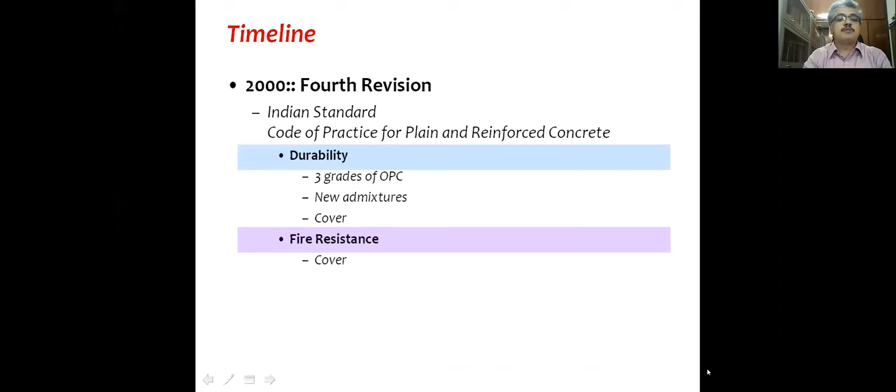Then a lot of effort was put on durability and fire resistance in the 4th revision, which came out in 2000, two decades from today. But in the 2000 version, structural design provisions were not significantly touched - only very minor changes were made. So effectively, the structural design provisions being relooked at now, in 2020, are essentially 42 years old or even more, and that is an issue we need to look at carefully.

What the 4th revision did was acknowledge that by then a lot of higher grade materials, particularly concrete, had come into the market, and the code allowed use of up to about M80 concrete. But then in a small note, it says that for concrete compressive strength greater than M55, design parameters given in the standard may not be applicable. This led many engineers to fall back on other international standards because our own IS 456 did not provide a solution. The other part is a lot of people did not pay attention to this and went ahead designing structures with the same stress block, even for higher grades of materials. So both things happened in the last 2 decades.

So this is what we saw, IS 456 covering all 3 methods, and some of us who are also familiar with other international codes know that there is a 4th one, which is the LRFD method of design. So one of the first things to decide was what this new revision of 456 is going to bring in. The decision was to continue with limit state design for very good reasons that we have, and so the basic framework of the code remains unchanged. So we are going to use characteristic values, and then have partial safety factors for concrete and steel.

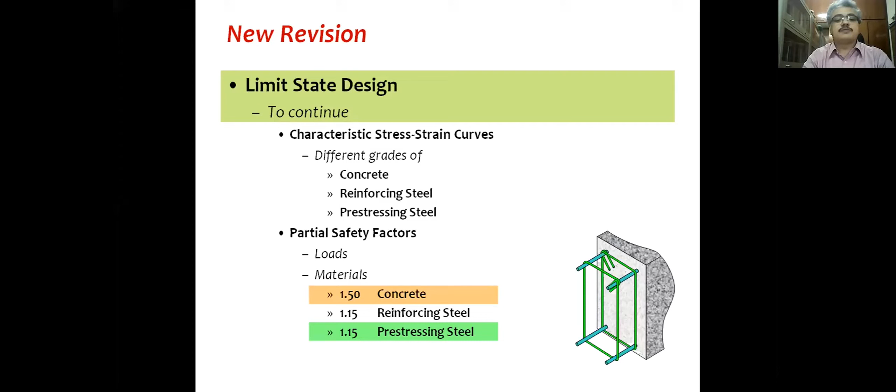Now, having agreed upon that, the next issue was in design. We talked about limit state design being based on the limiting strain value, so what are the limiting strains? Earlier we had these HYSD bars, which was part of the 1978 version of the code, and SP16 charts and everything used this. So we are going to continue with that for the purpose of design, the design curve is not going to reflect any possible strain hardening. That is another issue that was decided. But the question was, what is the limiting strain?

So for this HYSD or CTD bars, they did not have any definite yield point, so 0.2% proof strain was considered as the limiting strain. Even for mild steel, the same thing was used.

And today we have a third group of reinforcing steels in the market, which is the TMT bars, whose stress-strain curve, if watched closely, reveals that of a mild steel kind of behavior. So essentially it has this very elastoplastic behavior, at least near the yield region. So what is agreed or decided is that we're going to use an elastoplastic idealization for the design stress strain curve of reinforcing steel, which is probably long due. And so now, with grades of steel as high as Fe600 being admitted, these are going to be the limiting strains, which are going to be very critical for design, as we see. So that is for steel.

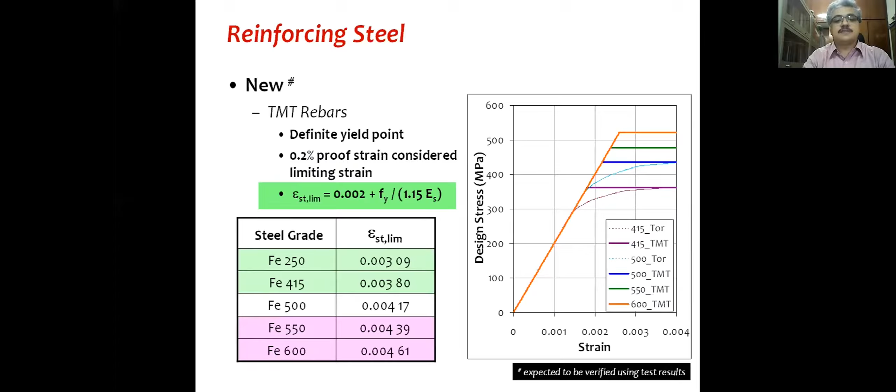Most in the initial days, most experimental results were up to about M40 and M60 grade of concrete. Of course, today we have higher experimental results for that. But essentially, that is extrapolated, or if it is extended, this is how the ultimate strain is seen to reduce. This is essentially the nature of the stress-strain curve of concrete if testing is done, so the ultimate strain reduces with increasing grade of concrete. But the interesting fact is the strain at which the peak stress is attained increases. So the earlier stress block which used 0.002 and 0.0035 as fixed values now has to be relooked at because of this particular aspect.

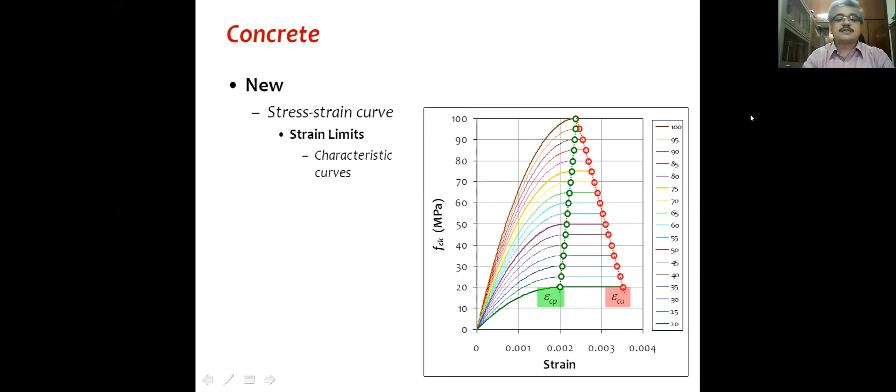And that is why, based on a lot of looking at test data which are provided, available, and other things, this is how the stress strain curves are defined, uniformly from the initial region, and the ultimate strain is going to become particularly crucial, especially the second one, for the design.

So what is the stress? This is the design stress strain curve. The expression is simple. Now here is another aspect that many codes give a different power equation.

Do we adopt that? Probably it will be simpler to give one expression for all of it and just use the quadratic equation which was there originally, instead of changing the power based on grades. So at least one thing is taken out of the equation.

But this is done considering the fact that the ultimate strength capacity is more or less maintained. So that is how these values are arrived at, so that the ultimate estimate of strength is not compromised or significantly changed, but this is how the strain values are decreasing.

So for most of us, we have to now migrate from these fixed values of 0.002 and 0.0035 to different values based on grades of concrete. And as Mr. Arora highlighted, at M100 eventually these two values coincide.

Now, since the stress block is changing, that is the ultimate strain is changing, the stress block parameters would also change. So for all of us who are very familiar with 0.36 FCK and 0.42 or 0.416, obviously the stress block parameters are also going to change. And it's a very simple calculation, expressions will be given.

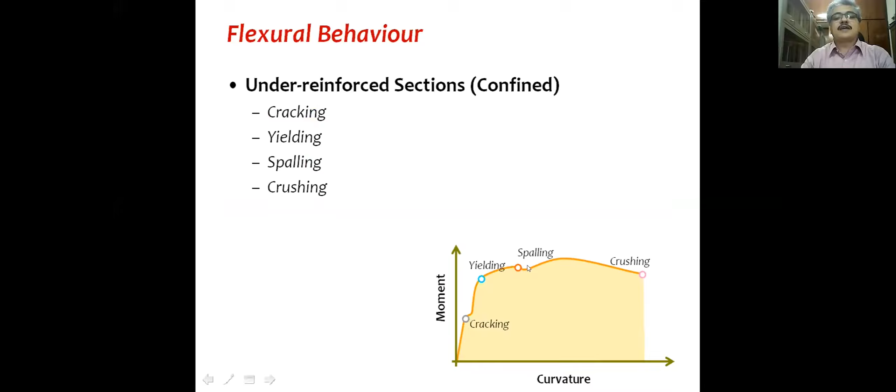So essentially, if you look at the response of the moment curvature behavior of a reinforced concrete section, these are the salient features: cracking, yielding, spalling, crushing, and probably there will be buckling of compression reinforcement thereafter. But for our interest, these are the important aspects: cracking, yielding, and crushing.

And this response, if we are to idealize, then we see that there are two aspects that we need to look at: two levels of strength.

One corresponding to where significant yielding is happening, and we design under reinforced sections for that, for the steel to yield. And then one corresponding to what we call the ultimate strength, which is corresponding to crushing of concrete, or what we call the secondary compression failure.

And similarly the deformations or curvatures: there is an effective yield deformation or yield curvature and ultimate curvature. So now you see that the focus is getting shifted from strength alone to the entire load deformation response, so that we look at both strength as well as deformation.

Now, in terms of strength, the IS 456 or design, structural design in essence is about providing adequate strength capacity. And so we used the definition of ultimate strength corresponding to secondary compression failure as the definition of design strength. The objective was that this estimate should reasonably agree or match with test results.

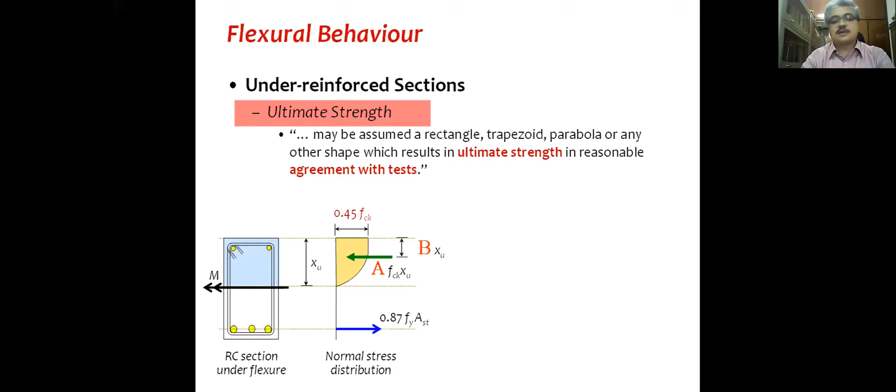So for shallow beam sections, that worked very well. And when the full stress block is mobilized, we get an estimate of strength which matches very closely with experimental results.

But the question is, now we are going to have structural walls, and most multi-story buildings necessarily have structural walls. Is it really possible to mobilize the full stress block in such long RC sections with steel distributed on the other two faces? In shallow beams, the steel is distributed on the highly compressed edge and the tensile edge, whereas in these kinds of sections, steel is distributed along the length. So is it really possible to mobilize this, is the question.

Now, this will vary depending on the percentage of steel, the grade of concrete, the grade of steel, the dimension of the wall, and so on and so forth. But what is being seen is that this margin can vary anywhere between 10, 15% to 50%.

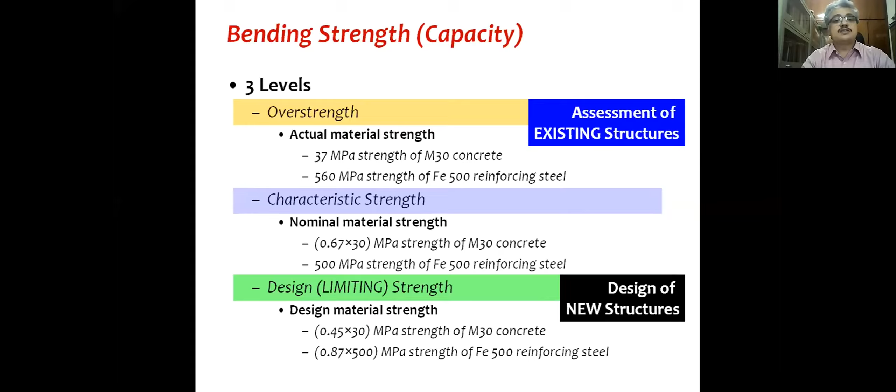So we have three levels of strengths and two levels of demand. So that is the capacity, this is the demand. Of course, we have the factored loads and unfactored loads, which is going to be used for serviceability checks, and factored loads are going to be used for safety, the structural design safety, where these load factors will be used.

Obviously, only the relevant load cases will have to be considered, and this gives the combination that needs to be taken care of by the designer. I'm not showing the load factors for all those cases. So that was for the load.

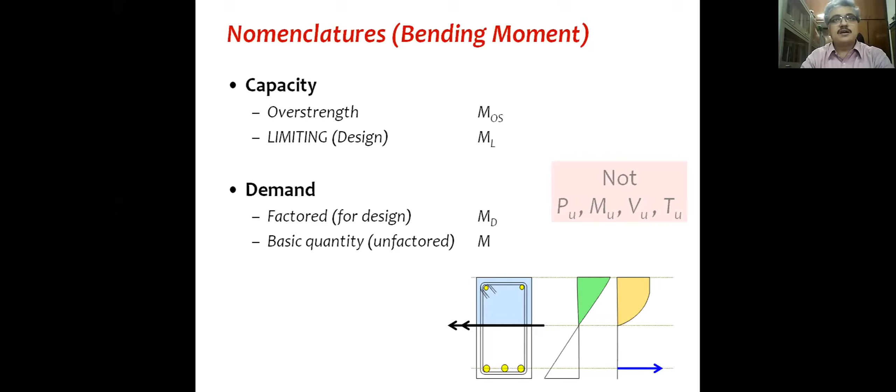Then there was another issue, which is the essence of design. For the basic quantities, let's say bending moment as an example, M represents moment, and essentially this represents the unfactored value. But when it comes to safety design, that moment demand will be called MD, the design moment or demand. Whereas for the capacity, it will be called M sub L to explicitly denote the limiting moment capacity of the section, and of course there will be overstrength moment capacity. This is done so that we don't get confused when we say PU or MU, not knowing whether it is the factored axial load or the design axial capacity, the factored moment demand or the moment capacity. So that confusion will not be there anymore, hopefully.

So with that in place, now we move to analysis. Analysis is going to be important, as always, for the purpose of design. The basic philosophy is that we try to ensure that the structure, structural element, or whatever it is, has capacity more than the demand that comes. For instance, in case of bending moment, we'll be writing ML should be greater than or equal to MD, the design moment, which is the demand. But then these words, capacity and demand, are only estimates.

So for instance, if we look at demand, we can have an upper bound estimate of demand or a lower bound estimate of demand. This is where design codes have to come in and specify how these quantities are estimated. For instance, when you talk about doing linear elastic analysis, we get an estimate of demand, let's say bending moment in a column. But we all know that under certain situations, if we do a second order analysis or a full nonlinear analysis, there can be additional moments because of P-delta effects.

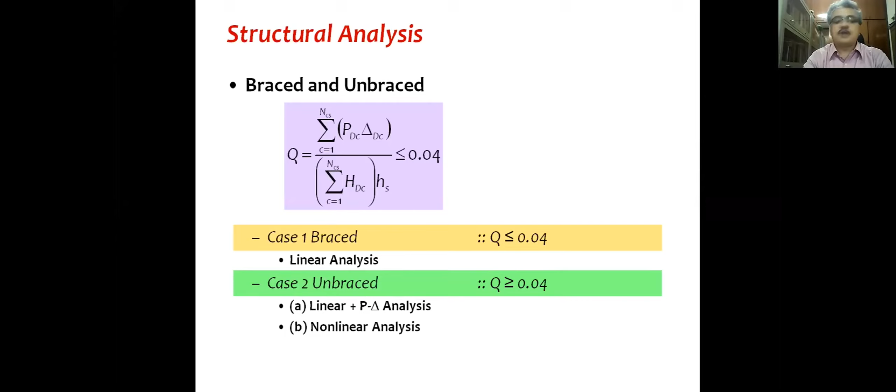So one is the linear elastic analysis, then we should do second order analysis where there is an approximation in terms of giving additional moments. All of you will recall that for design of long columns, we add an additional moment, so that will be continued. Or in special cases where full nonlinear analysis is possible, demand can also be estimated based on that. This process is going to continue as it was in the previous code, decided based on the stability factor - if it is less than a certain value, linear elastic analysis is okay. Otherwise, it can be done in two stages: linear analysis with the additional moment, or a full nonlinear analysis. So that is going to continue as is currently available.

But this kind of analysis is relevant only when we have frame action, flexure dominated behavior. There are a lot of concerns in the industry today about design of sections where the classical Euler-Bernoulli hypothesis doesn't work, for instance pile caps and corbels and so on. So for those situations, the IS 456 committee intends to bring in strut and tie analysis and design method for the first time. Although it was mentioned in the previous code also, probably this time it is going to be brought in.

So just to summarize, conventional analysis - we do finite displacement based structural analysis, which most computer softwares follow. This is the matrix method of analysis, which can be linear plus additional moments, or a full nonlinear analysis considering geometric nonlinearity.

But while we are going to rely on computers for doing our structural analysis, it's important not to lose touch with the basics of engineering. That is where a lot of the simplified analysis already there in IS 456 are going to be continued - for instance, moment coefficients for slabs on stiff supports, distribution factors, shear coefficients, moment coefficients, and effective length factors for columns and walls. These are going to continue because they really give a feel for the behavior. It's not going to just come out of a computer software where you blindly take those numbers and go ahead with the design. This gives an opportunity to understand structural behavior, and so it is important that these are continued in the current revision.

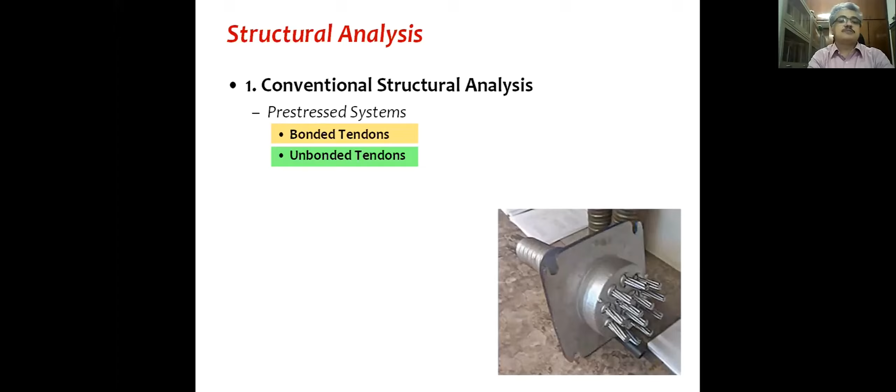One particular issue which Prof Murty touched upon is that we have a building or system where some part is going to be PT. A designer designs the building, details it, that part is done. The PT part is left for somebody else, who comes and gives a design, and the whole thing is constructed one after another. But when this slab is in tension, all the columns and beams are going to have a relative deformation because of that, and this holistic analysis is not being done today.

So probably the code is now going to insist on a wholesome analysis rather than analysis and design by parts, where somebody does one part of the design and somebody else just adds another part. This is something we need to watch out for in future, and we should be doing it.

Talking about continuing with analysis, in the previous code, it stated three options for modeling properties: gross section properties, transformed section properties, or cracked section properties. But the cracked section property had to be calculated, and nobody was sure how to do it or what to do, since it would change with different elements, so nobody did that. Now, in line with other codes, this is going to give these cracked section properties, which are to be used for your load and analysis of frame structures.

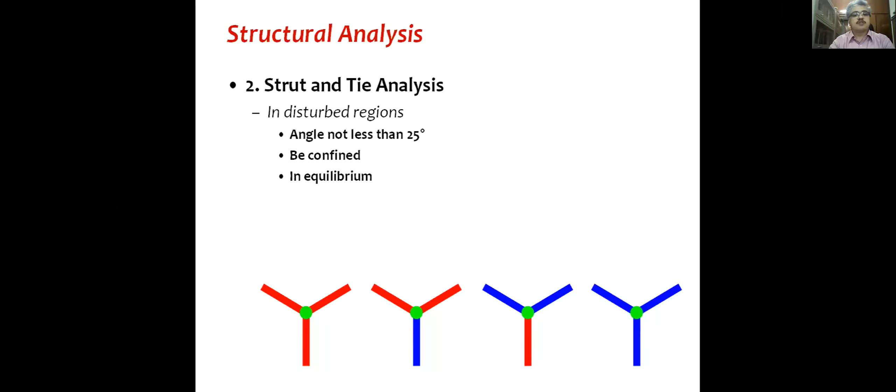Now I'll quickly move on to the design strengths. These are the basic design parameters, material properties used in design, and Mr. Arora showed most of it.

The very first thing is this: we in India are stuck with cube strength and then conversion back to cylinder strength. So cube to cylinder strength conversion is something we have to live with. But watch out -- the classical value of 0.8 is going to continue to be used for design. But for assessment, now we have more rational data to be used, based on experimental data that is available with us. So this is a slight change from what we have been doing earlier, and since assessment, as I said, is going to be an important activity for the engineering community.

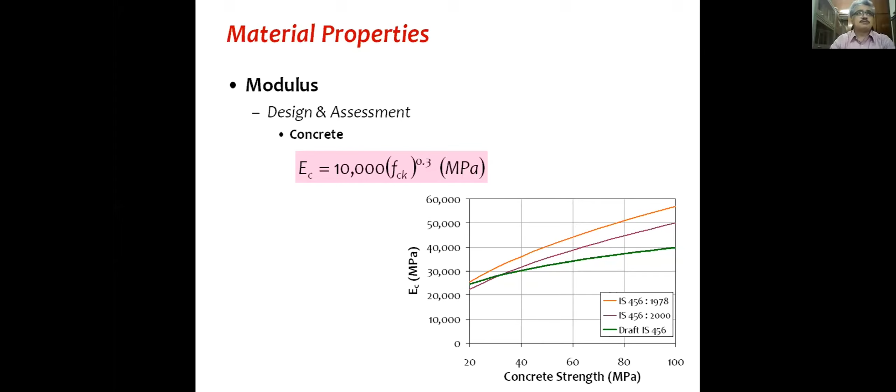In terms of modulus for reinforcing steel, it will be 200 GPa as usual. Prestressing steel, 195 GPa. Mr. Arora showed about the modulus of concrete. Here again, there's a slight change. All of us are very used to 5000 root FCK and 5700 root FCK, but now we are going to see a slightly different expression for modulus. We will get used to it. This is based on a lot more experimental data which is now available with us.

However, probably as of now, the code is going to fix it at M40 and Fe500 steel, just for want of reliable experimental data. Probably as and when more experimental data is made available, we can have some revisions to this. But for now, even if you are going for higher grade concrete and different higher grades of steel, we will stick with these for the purpose of structural design.

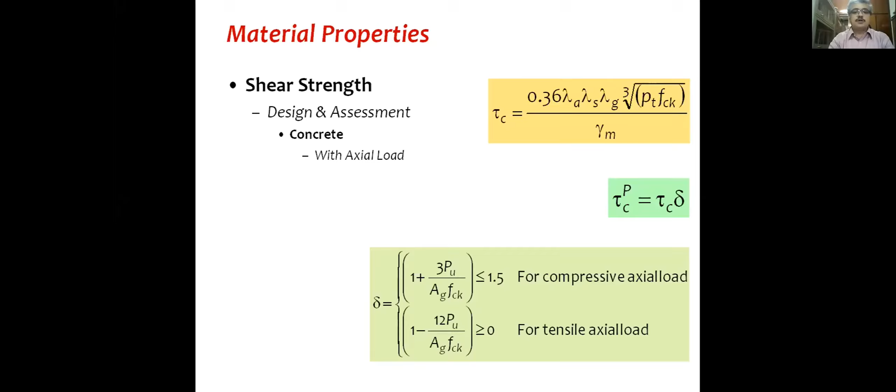As usual, now since N is also part of it, for columns and walls where compressive loads will be present, the same modification enhancement factor of delta is going to be continued for the shear capacity, shear strength capacity of concrete TauC.

So we probably are saying that we have a little more confidence in shear capacity, and so that is going to be useful for our design.

As far as tensile strength is concerned, it is now going to be 0.5 square root of FCK. We have to get used to these little changes, because this issue of mean versus characteristic plagued us a lot. And the earlier expression was probably more towards mean value.

We wanted to bring it down, make it consistent, and bring it down towards characteristic. So, but still it is only mean minus sigma. So it's going to be 0.5 square root of FCK.

As far as compressive strength is concerned, we are going ahead with the same thing. So 0.45 FCK is going to remain as 0.45 FCK, except that the strain limits are now going to change. Strength limit is not changing, strain limit is changing.

Now, for structural design, as Prof Murty showed, now we are going to have 6 limit states, the first 2 being the limit state of safety and limit state of serviceability.

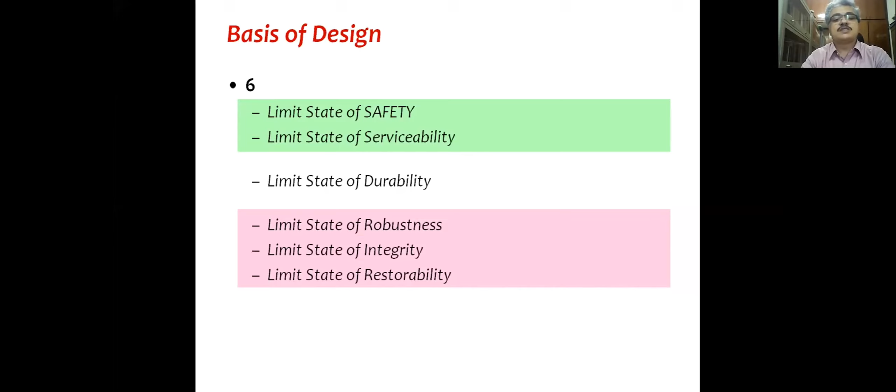But all these shall be looked at only when we don't have instability in the structure. So only when there is no chance of overturning, no chance of sliding, no chance of flotation, subsidence, and elastic instability.

So these are the first checks as far as limit state of safety, serviceability, and so on and so forth.

As required. In this regard, as it was already there in the previous code, for initial proportioning, some basic guidelines are provided.

One is with respect to absolute sizes, and then the relative sizes in terms of L by D and other aspect ratios.

Similarly, as before, guidelines are provided with respect to reinforcement, minimum and maximum.

And now an attempt is made to bring all of it in one place so that if these basic guidelines are followed, you already have a design, a structure, right?

And generally it is believed that if these guidelines are followed, the limit state of serviceability will be satisfied.

Because there are checks to be done, but in general, it is expected that limit state of serviceability will be satisfied. So the whole purpose of analysis and design thereafter will be to improve, to economize, and so on and so forth.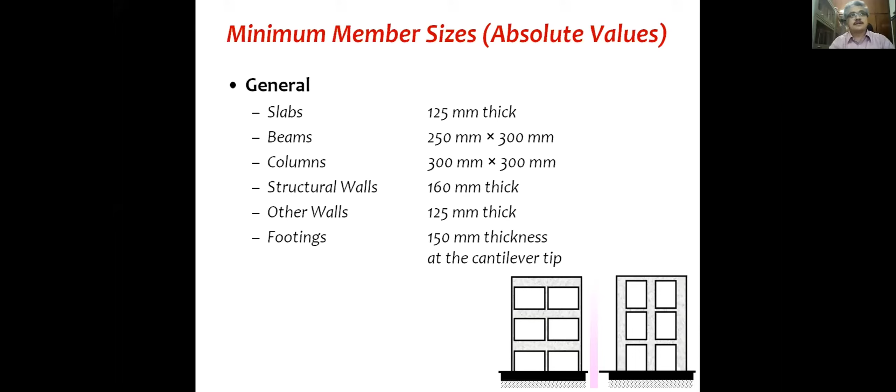From a structural point of view, there are durability and fire requirements also over and above this. But then for simple residential buildings, let's say up to 3 stories, that was discussed.

Some of these items are - there are relaxations which are provided. For instance, beams can be 200 by 250 and so on and so forth. So these kind of guidelines are provided.

Then with respect to fire resistance, there are guidelines for minimum member sizes. This table is slightly older because the new discussion is that NBC mandates that all structures be designed for minimum 2-hour fire rating, so we might as well remove the first 2 lines from the table. This is another aspect being debated right now, but effectively we'll have a table giving minimum member sizes from a fire resistance point of view also.

Just like member sizes, we have cover. Arora ji talked about cover and how it is arrived at in detail; I'll just show the final answer. Essentially, the nominal cover is being defined based on 3 requirements: the structural requirement, that even if the cover concrete falls off the member should not significantly lose its load carrying capacity—that's the basic premise; then the durability requirement; and finally the fire requirement.

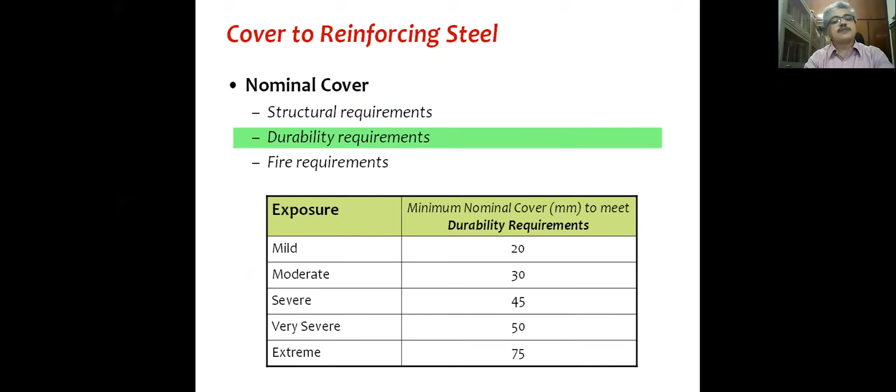So from the structural requirement, these are the nominal covers recommended. Then we have durability requirements for mild, moderate, severe, very severe, and extreme exposure conditions, and again we have requirements of nominal cover from the fire safety point of view.

So these give us the basic dimensions, but then there are relative dimensions which we also need to look at, because we do not want too slender or too stocky members present in the system, and overall stability is also an important aspect that needs to be looked at.

So beams, as earlier, are those whose depth by breadth ratio is less than 2.5. Columns are also the same, and structural walls are those which have this depth by breadth ratio more than 4.

Now what about those sections which are between 2.5 and 4? We all know what usually happens, because then they are neither called columns nor called walls. Since they are not called columns anymore, we generally love to use these kinds of cross sections because of the minimum percentage requirement that we had. But now the code will be very clear that these kinds of sections, because it's about behavior and not anything in between—they neither behave as a column nor as a wall—will be discouraged. But in case we have them, we have to design them as columns, so they will not be treated or considered as walls, but as columns, and be designed and detailed accordingly.

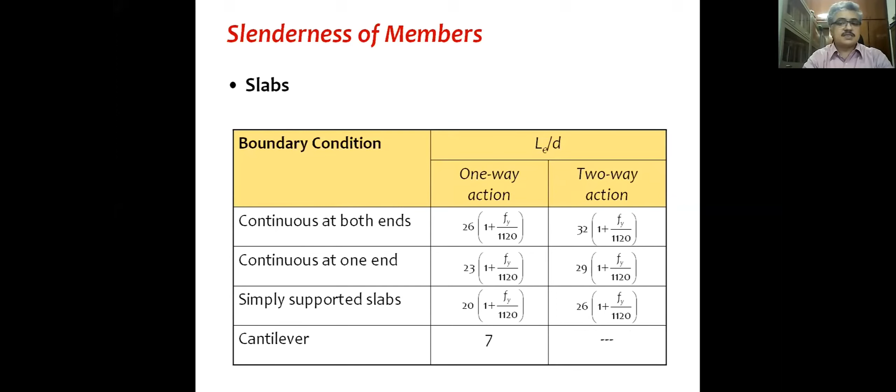In terms of minimum longitudinal reinforcement, of course we are going to have higher grades of steel, so for slabs it is again fixed at 0.12%. But for beams we will have a slightly different looking expression than what we currently have, 0.85 by FY, which was not dependent on grade of concrete. That was probably because the grade of concrete admissible as per previous versions of the code, particularly the 1978 version, was only up to M40. Now we have a wide range, so it's important that this minimum longitudinal reinforcement takes care of the grade of concrete and grade of steel. Accordingly, we will have minimum longitudinal reinforcement requirements in beams depending on the grade of concrete and grade of steel that we choose to use.

In terms of columns, earlier we had one single value. Again, that was okay in 1978 because we had very little change in grade of concrete and grade of steel—options were not too many. Today we have a lot of options, and that is where the minimum longitudinal reinforcement requirement in columns is going to go up as we move ahead with using higher grades of concrete. It's important that we recognize the associated effects of creep, shrinkage, and so on, particularly the reduction in strain capacity of concrete as we move towards higher grades of concrete, and that is why it's important that we protect our vertical elements—the columns and the walls—from any damage or failure.

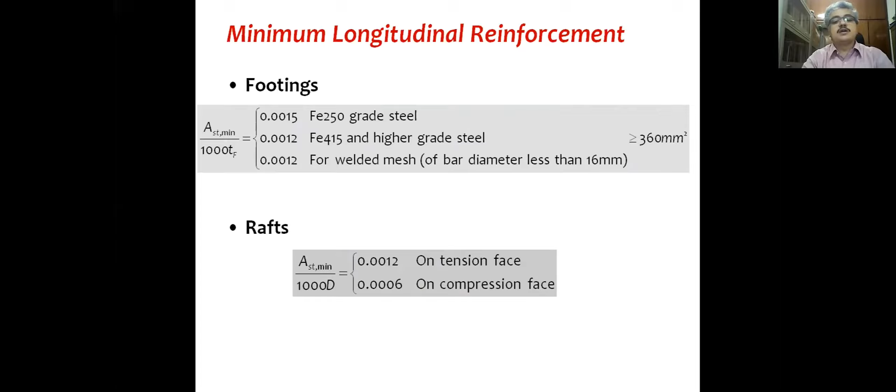In terms of minimum transverse reinforcement, slabs mostly don't require it, except in very special cases. But beams now have a minimum transverse reinforcement requirement. Earlier, we just had a design part, minimum spacing, maximum spacing requirements, and minimum bar diameter. But now there is an additional calculation to ascertain whether a minimum amount of transverse reinforcement is being provided. Same is the case with columns. So it is not going to be nominal ties based on diameter and spacing as usually provided, but a more computed value of transverse reinforcement ties and stirrups that will have to be provided. And then structural walls when required.

Coming to maximum reinforcement. This expression looks a little involved, but essentially it says what the earlier code also said, that over-reinforced sections will be prohibited. Same is the case now. So the limit for maximum reinforcement is whichever is less, either that for the balanced section or a predefined value. For slab, it is kept at 1%. For beams, it is kept at 2%. And for columns, we'll see this case.

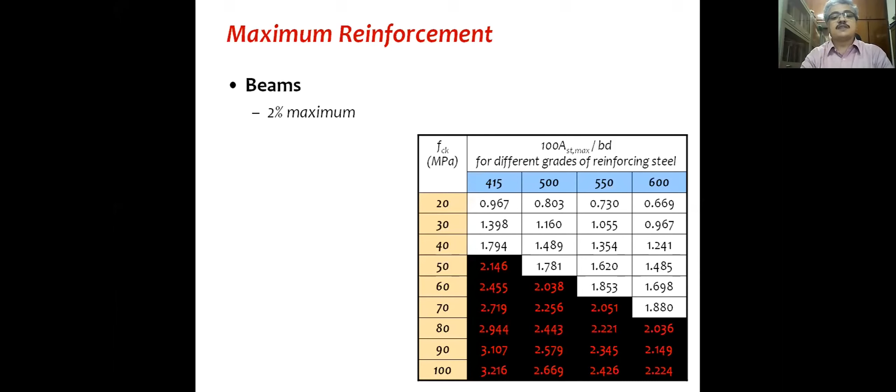For columns, of course, 4% is generally considered. But then many practicing engineers will say we should bring this down even further. We will be very glad to get such inputs from practicing engineers, because congestion of reinforcement is an issue that most engineers deal with on a daily basis. But right now, this is where it is kept.

In terms of structural walls, as you can see, in this revision structural walls are brought to the front. Importance is given to structural walls because we have other relevant Indian standards which now mandate the use of structural walls in buildings, particularly multi-story and tall buildings. So IS 456 has to be very explicit and generous in terms of provisions related to structural walls. You will see a lot of these provisions in the upcoming version.

So the web portion's maximum reinforcement is pegged at 2%. These numbers are all debatable. These are proposals; they can be lowered or enhanced depending on larger consensus, so do not worry about those. Similarly, we have the boundary elements, which are essentially going to be treated more like columns, so the requirements are very similar to those for columns. So a lot of details.

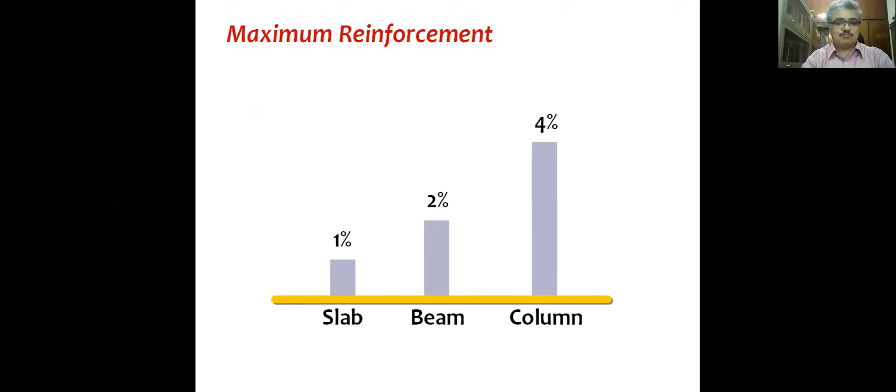Coming to structural safety, since we have the design stress-strain curve for the normal stress of materials defined, all design calculations will necessarily be based on principles of mechanics. Equilibrium equations, compatibility conditions, and constitutive relations will be the dharma in all design calculations. Empiricism will be avoided as much as possible. This is important so that young engineers and students learn the subject and don't just become engineers knowing how to use computer software to come up with a design. That is important, and this is going to be applicable for both reinforced concrete and pre-stressed concrete.

As Professor Murty pointed out, the whole thing is going to be elaborately presented so that all the design calculation steps are easy to remember. As far as pre-stressed concrete is concerned, there is going to be a change, particularly in terms of the estimates of flexural and shear capacities, in line with what has been presented for reinforced concrete. But there are a whole lot of other issues related to pre-stressing, the methods of pre-stressing, and so on, which are going to be brought in from IS 1343 with necessary adjustments and modifications. Most of it is being redrafted for consistency so that we have a nice flow in the new IS 456.

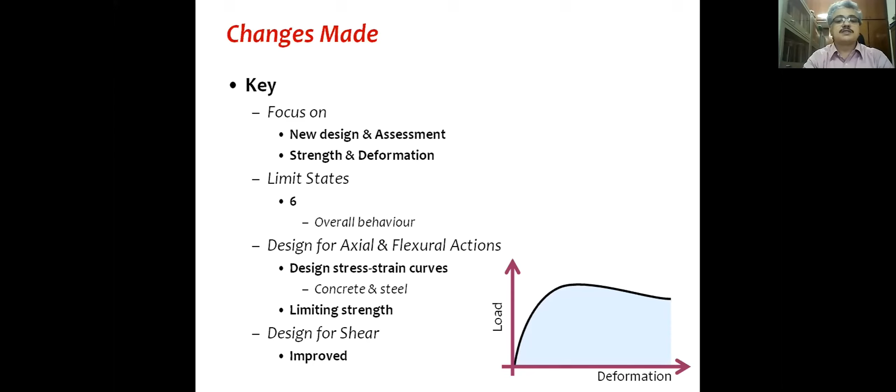Now, as I started off by saying, the intent was not to suddenly come up with a code which looks very different and very new. So a lot of items are still retained. They are completely redrafted for a nice flow, but essentially a lot of things are retained. For instance, simplified analysis is still going to be part of this new code, because you don't want everybody to run a computer program to do small little designs. That is where engineering sense comes from, not by running computer programs. As Professor Murty highlighted, design for shear is still going to be stress-based, but fortunately in future we'll be able to move that also to strain-based design.

Before I end, I will focus on certain implications of the use of higher grade materials, because of the basic need for revision of these materials in our daily construction activities. So what are these? What are the immediate ones which we design?

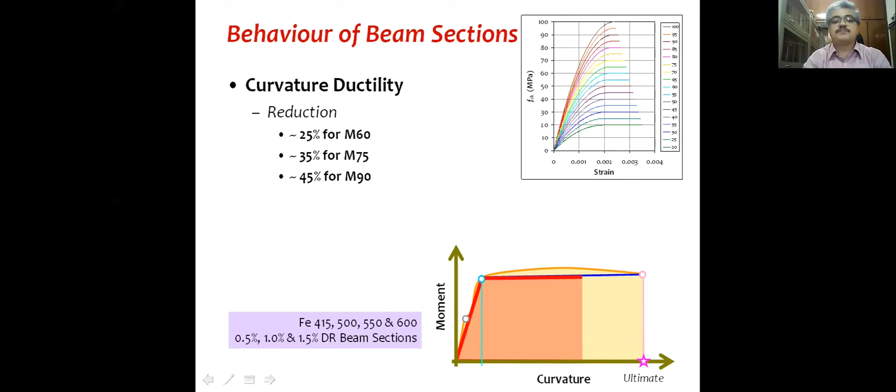Similarly, one very important discussion during the deliberations was the design for shear. We are all familiar with this expression. Now, what happens when we use a very high grade of steel? Fy increases, which requires providing lesser transverse reinforcement—thinner, lesser diameter stirrups, or at larger spacing. The current code has a clause stating that for design calculations, Fy cannot be taken as more than 415.

And that is going to continue now. So there is probably not much incentive to use higher grades of steel, particularly for transverse reinforcement, because that is not warranted or desirable. Thin stirrups at larger spacing is not good for structural reinforced concrete and prestressed concrete members. So that is not something the code is likely to allow.

Talking of slender members, when we go for higher grades of steel and concrete, essentially strength capacity is more for a given amount of material. So for the same load, we will probably come up with smaller column sections, and we'll be tempted to provide that.

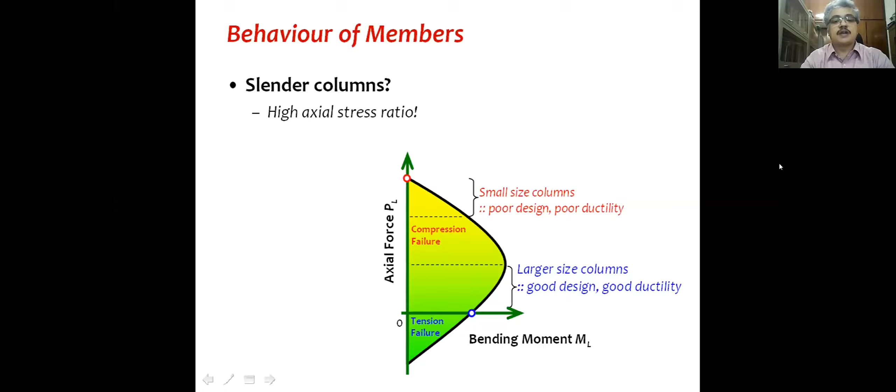But if we do come up with slender members—slender beams, slender columns—our structures are going to be more flexible compared to what they are today. And that will definitely have associated effects in terms of lateral drift, vibration, acceleration, and so on.

More importantly, there's a lot of effect on the non-structural components that we have today, particularly in commercial buildings, multi-story buildings, and so on. The cost of non-structural components is huge as a proportion of the structural cost, so we will possibly be jeopardizing those also.

The big picture is that through this revision, an attempt is being made to bring back structural behavior in focus. As designers, we have to always think about the big picture and put structural behavior in focus, not get lost in the details of analysis and design. That is the important message from this new revision of the code. It is not just designing for flexure, a beam, or a column, but the overall structural design that a designer is usually responsible for, and that is the structural behavior that is important.

So in closing, yes, there are some major changes and many minor changes, and that is possibly the cost of waiting for 4 decades, 1978 to 2020, and possibly it will spill over to 2021.

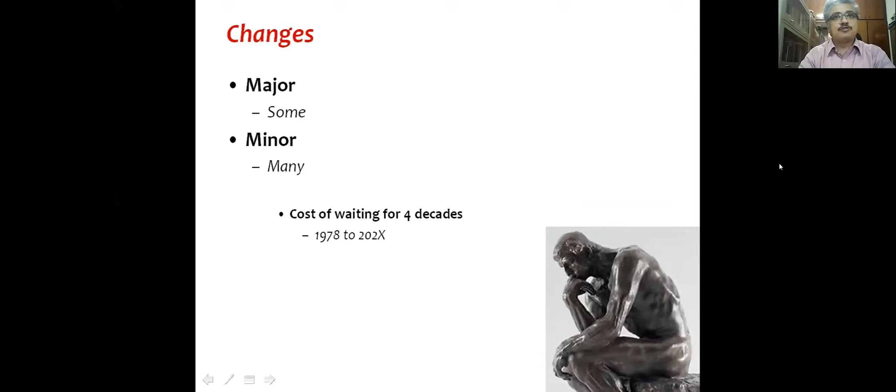As Professor Murty pointed out, an entire generation of engineers are probably younger than the structural design provisions we are currently using, and that is what is leading us to this situation. If we revise our codes every 3 to 5 years, probably we would not be in a situation like this. That is where we need cooperation from everybody, academia, industry, everyone has to pitch in, because a lot of changes are happening and that needs to be disseminated.

This is where it's important that we all work together. A lot of testing needs to be done.

There is scope to go back to classroom and learn the subject once more. Students, teachers, engineers, all of them will have to pitch in and do their bit to understand this new paradigm of structural design.

This is where we'll have to work together. This is only the beginning. This opportunity for consultation is a wonderful concept, and we need to not just dwell on the minute details of design. Those are important because that is the daily job we do, but we also have to know, understand, and appreciate the overall intent.

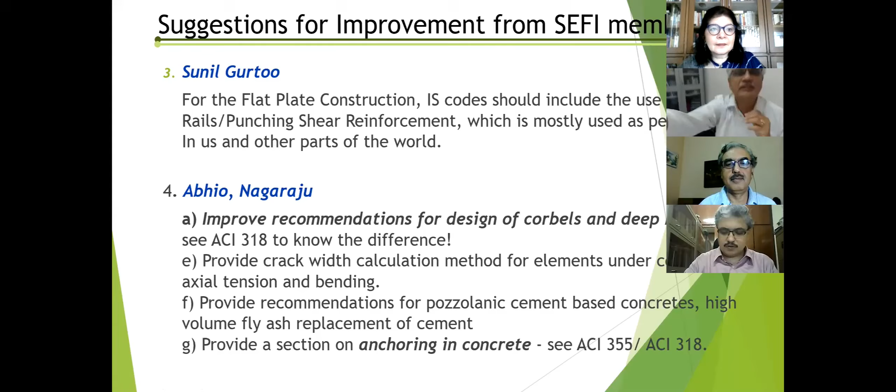Flat slabs don't become something special only in earthquake conditions, but also become special in non-earthquake conditions, and we have to address that. That is what we will have to do - put a strict set of conditions, and only when they are satisfied can you use flat slabs. That kind of indiscriminate situation is not looking fair. So we may have to come up with tighter regulations as sought by ALPA.

Rupen? So for instance, IS 1893 already recognizes it as a system. So I completely agree that we need to have very clear provisions for this. No doubt.

The next one, would you want to? Sorry. Yeah. Can you see that? You've gone. You have to share this. I'm sorry, I think the problem was with my screen. I apologize, I have a slow server presently, so apologies to everybody.

So the question being asked is that the chapter, the section on the design of corbels and deep beams and so on, is a bit weak, I think as all of us would agree. So are you planning to look at that? I'm not going to talk about crack width calculations and pozzolanic cements, because I think that is being addressed very comprehensively - Aroraji's team has really put in a lot of effort. But the other issue people are talking about is this problem of inadequate requirements in anchoring in concrete, and this was echoed in a lot of email discussions we had on SEFI. So your thoughts on it?